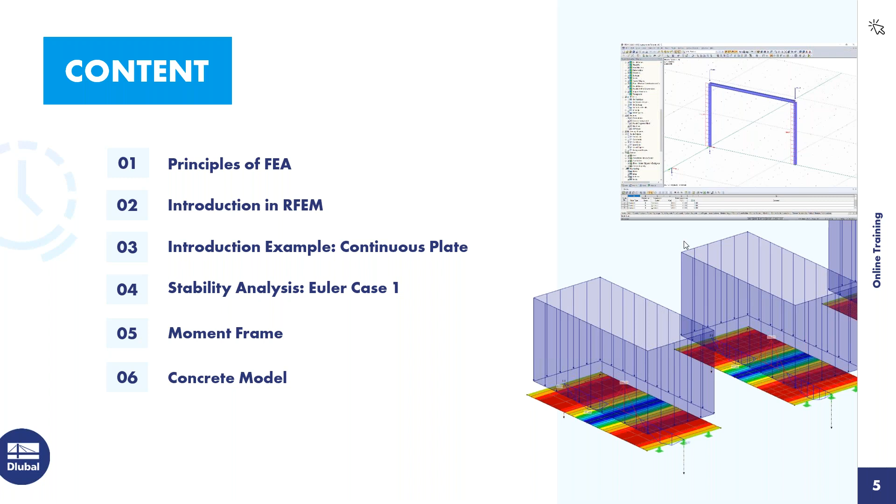So now we can just dive right into the first subject, which is the basics of FEA software.

When using computer software like FEA software, it is mostly and usually based on the displacement method. Another method you may be aware of is the force method, where the unknown is the force and the internal forces need to be calculated. With the displacement method, the unknown is the displacement. So to solve for this, the displacement vectors must be calculated, and then the internal forces and support reactions can be determined. The main problem today is an analytical solution can be difficult to determine with large complicated structures.

Doing hand calculations for some structures with complicated and odd geometry can almost be impossible, or feel like it's impossible. The limits are being reached with large complicated structures, and it's just difficult to get accurate results. So this is where FEA software comes in.

Structures can now be modeled and converted into a finite interconnected element mesh. The material and cross-section properties are determined or given at each FE mesh node. The mechanical behavior is transferred between these elements. Discretization is a word that I would like you to walk away with, and this is the act of structures being submeshed into finite elements, which is done in FEA software.

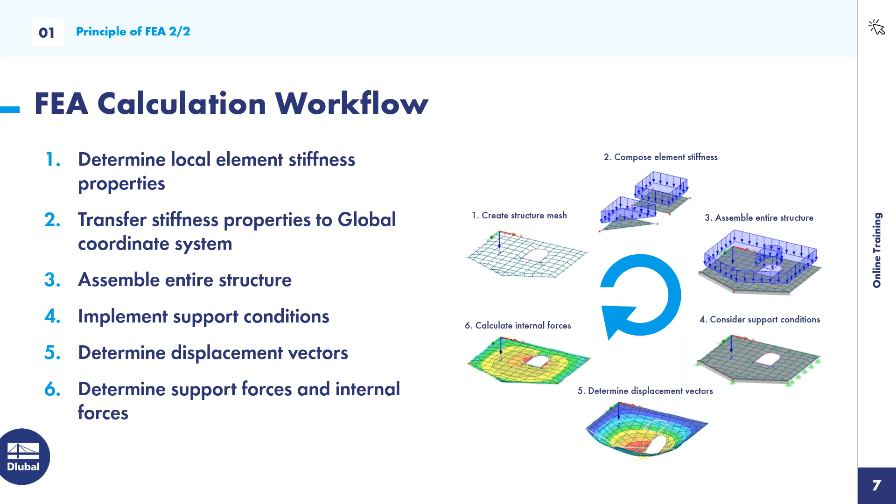But before we do that, I do have a question or a test to give, so I'm going to pull that up. You should see that on your screen right now. I'll give everyone about a minute to answer that, and then we can go over the answers.

Okay, so it looks like almost everyone has answered, so I'm going to close the question. You can see the results here: 18% of you answered the second option, and 82% answered the first option, and it looks like most of you got it right. The correct answer is that the decomposition of structures into finite elements is discretization. So that's great, good job.

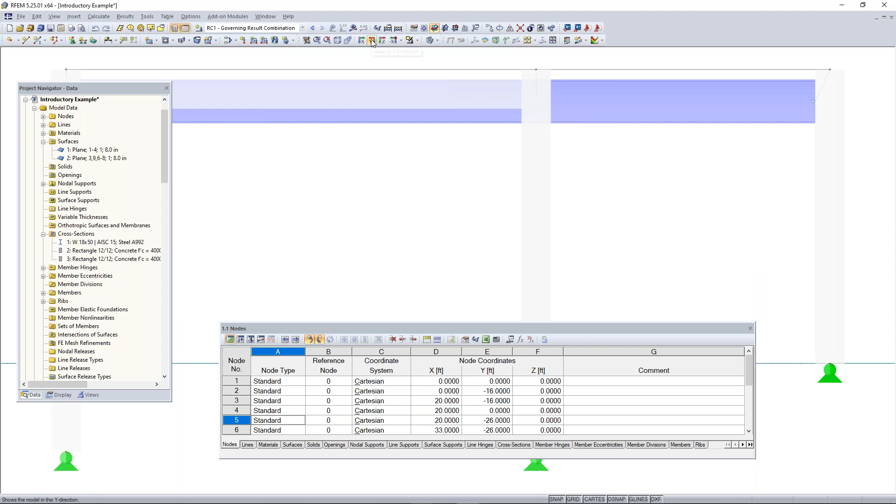We can also change the view of the model. If we go up here, in this category of the toolbar, we have views in the X direction, the Y direction, and the Z direction. We can also change these into the reverse direction, so if we want to get an elevation view of our model, or maybe a top-down view, we can choose these views.

In the project navigator, at the bottom here we have a folder called add-on modules. RFEM is great for viewing things like internal forces, but if you want to design your structure or elements of your structure, you will need to use add-on modules, which all student versions of RFEM come with, every single add-on module. This is handy and you can play around with these—they're basically for design of different materials, organized that way. You can also find the add-on modules up here in the toolbar, organized again based on design.

Next, we have in the project navigator our display tab down here. The display tab basically allows you to turn aspects on and off within RFEM. For example, we can turn off something like our surfaces, and this just turns off the rendering and display—the surfaces are still there within the analysis, this just allows you to turn them on and off visually. This is all organized based on expandable and collapsible folders, so things like loads and results, we can also turn on and off.

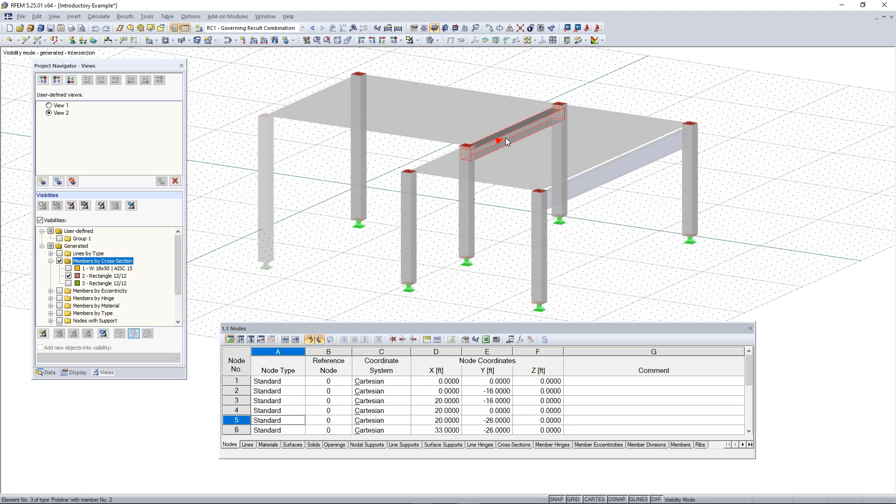Then the next tab we have is our views tab. We can create a visibility by turning our visibilities on. You can see right now I have my members by cross section checked, and if I turn this visibility on, only my members by cross section with a cross section of 12 by 12 will be shown—that's my beam member right here. If I turn that off, then everything is turned off within my model.

I can do the same thing for materials. So if I only wanted to view, let's say, steel A992, then this is the only thing shown in my work window, and the rest of the model is grayed out. I can right click and uncheck show hidden objects in the background, and then we simply have our beam there.

Next tab to show, if I turn off my visibilities, is the results tab, and this is the last tab in the project navigator. If I turn on my results, the results tab will pop up here, and again it's organized similarly to the display and data tab. I'm not going to go into the results in detail right now, but we will later on within our other examples. So I'm going to turn these off.

The last thing to go over before we hop into our example is how to navigate through RFEM. You can click in the scroll wheel button if you want to move your model around, and use the scroll wheel to scroll in and out. Then you can hold Control and click in the scroll wheel to rotate the model. If you don't have a scroll wheel, you can go up here to this tool called Move, Zoom, and Rotate. You can click on that and then left click to move.

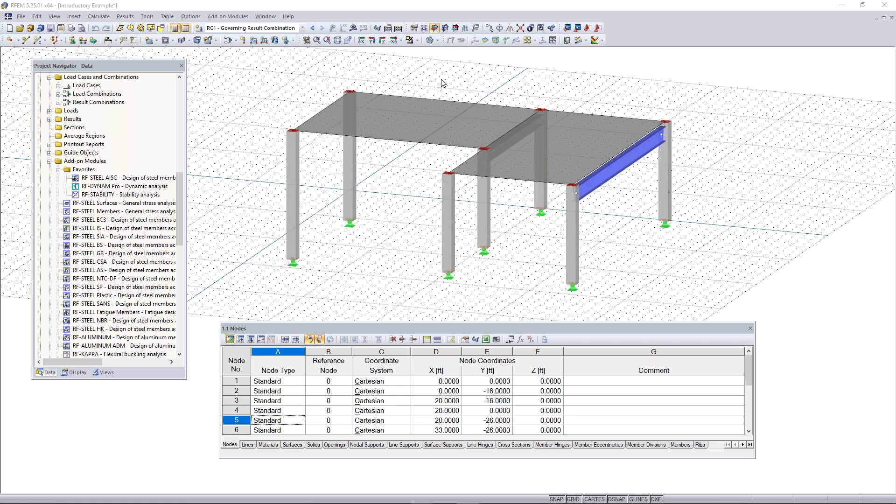Now we can go in and open our new model to start modeling our continuous plate example. First, let's go up to the new model button—this is a way to create a new model. You can also do this by going up to File and clicking New. We'll go to our model name, and we have to give each model a name, so we'll name this continuous plate example. You can also enter a description for your model—this isn't needed, but it is an option here.

Next thing to look at is the type of model. This is going to be a 3D model, but we could make this a 2D model, and you can choose the plane where you want your 2D model to lie in—X,Y, X,Z, or the YZ plane. We're going to leave our type of model as 3D, and right next to that is how the load cases and combinations are classified—you can select which standard you want your load cases and combinations to be according to.

We have a long list here of international standards: the US, Canada, Eurocode, and a list of others. So for now, I'm going to leave this as none, but let's say I wanted to design my model according to ASCE 7-16.

We have the option to create combinations automatically based on the load cases you create, and then the action categories are taken from there as well, and everything is created automatically. For this example, we don't need to worry about a standard, so we're just going to leave this as none.

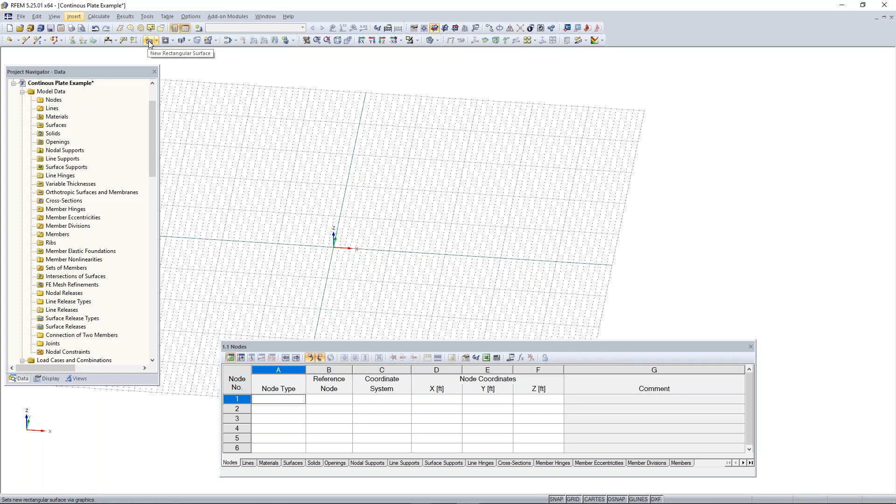Or instead of going to this menu, we can simply just go to our toolbar up here and locate the new rectangular surface toolbar button, which looks like this right here, and we can click on it.

And then you'll see that our new rectangular surface dialog box will pop up. The only thing you need to worry about here is, if you're not changing anything, we're going to keep the stiffness as standard. We just need to tell the program what material the surface is going to be and what the thickness will be. So right now it's saying create new material.

We can either create a new material and enter the material properties using this button, or we can go to our material library and select a predetermined or predefined material. So we'll click on that button, and then the material library will pop up in just a second.

So this is the material library within RFEM, and whenever you're choosing a material for any element, this is what will pop up. On the left-hand side, we can use the filter to find the exact material we're looking for, or we can also type it in the search bar down here. I'll just use the filter for this example, so we can choose concrete, and then we can choose concrete again for the subcategory.

I'm just going to use ACI concrete for this example, and I'll choose the latest ACI standard, 2019. Then I'm just going to pick concrete 4000 PSI. I'll choose that, and then you can see down here you can take a look at your material properties if you want to check those out. Then we can click OK.

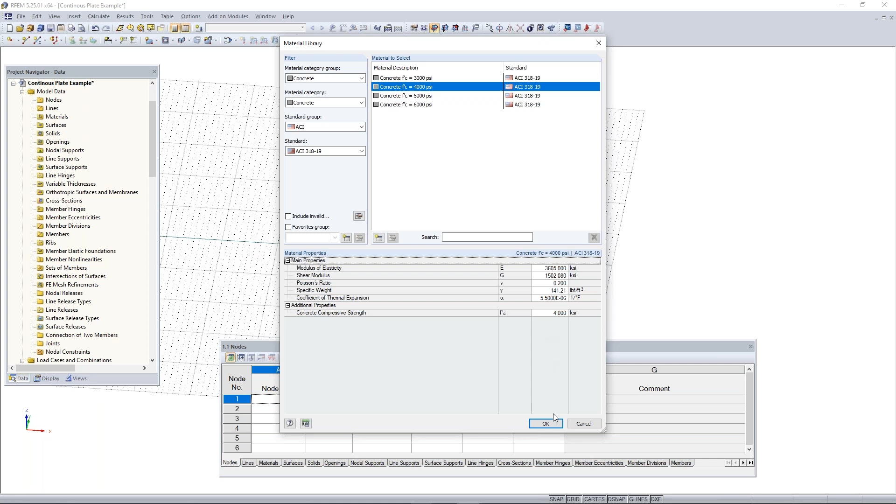So now we have our material chosen, and now all we need to do is tell the program how thick we want this material to be. By default, for imperial units, 8 inches is selected. We want to increase this to 12 inches for these plates. Then we can click OK, and now we can draw our plate.

You'll see my cursor has turned into this reticle-looking cursor, and I also have the coordinates right next to it telling me where I'm located along my XY grid plane. So I'm going to choose the origin, and then I'm going to draw a 32 by 16 foot plate. All I need to do is move over horizontally 32 feet, and then I can move up 16 feet in the vertical direction, and then left click.

So left click at the origin, and then left click a second time to mark that second point. Then I can right click, and once I right click, that will cancel out of the tool. You can also hit escape if you like as well to cancel out of a tool.

Now you see we have our plate here, or our rectangular concrete surface. Now the rendering in RFEM is just simply a 2D element with boundary lines defined, but in the calculation, the stiffness will be taken as 12 inches thick, so no need to worry about the rendering. This boundary line is located always at the center of the surface, so there will technically be 6 inches on one side and 6 inches on the other side.

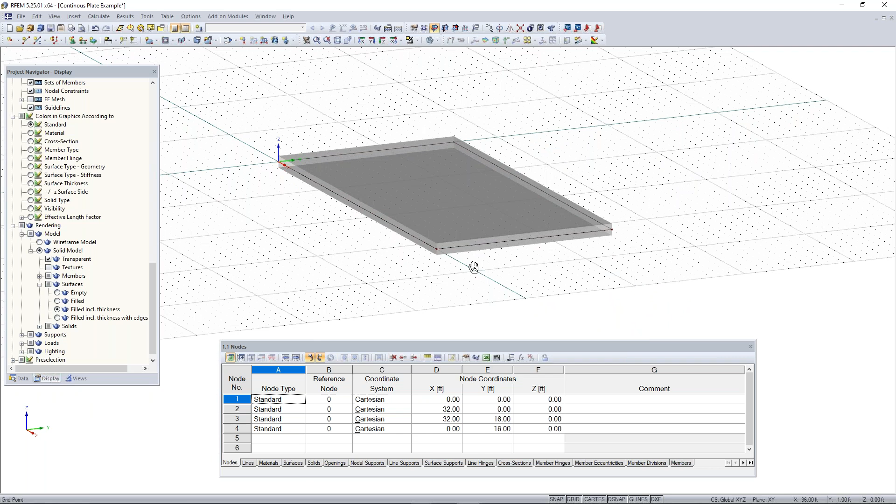If I go to my display settings and scroll down, we can change the rendering real quick just to show you what I am talking about. So if I go under rendering and change this to filled, the definition of the surface is always at the center. So if this is 12 inches thick, there's 6 inches of thickness on one side and 6 inches on the other side. I'll just turn this back to default, and then we can move on with modeling the other plates.

I can model the other plates by just going back to that tool and clicking OK. Then I'm just going to model the second plate right above the first one, and it's going to be 5 feet away from the first plate. So I'm just going to draw this one, and again it's going to be the same dimensions, 32 feet by 16 feet. Then I can right click to exit out of that.

Let's say I already have this surface here and I need to just duplicate it. I can simply select this second plate here by highlighting it from right to left or from left to right. Then I can use the tool up here called move and/or copy.

This tool allows me to make one copy of the element I selected, and then I just need to tell it which way to displace it within the plane. I can either enter displacement vectors, or use this graphics tool. I'll click this button, and then simply move this plate.

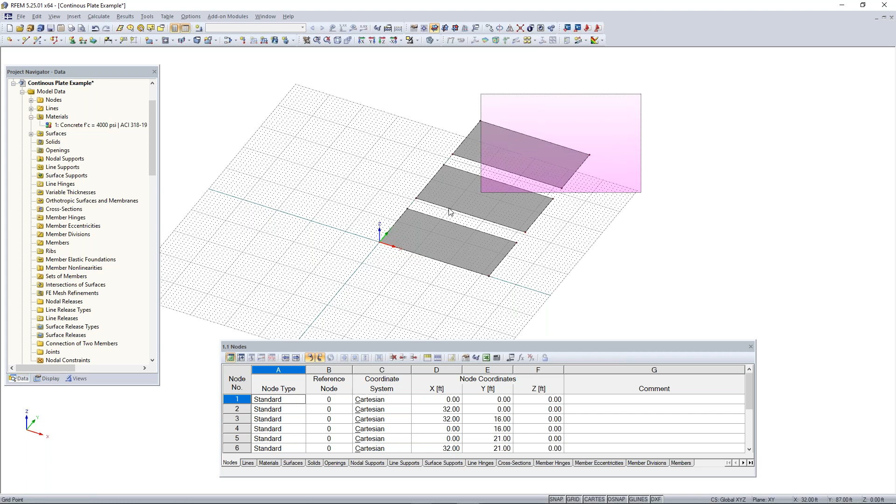Now we have all 3 of our plates here, and since my grid is only 50 grid points, or 50 feet by 50 feet, I'm just going to highlight all of my plates, left click, and then I can move my plates down into more of the center of my grid.

Next thing we want to do is model our beam. So what I'm going to do is create a new cross-section or create a new member. To create a new member, we can either go through the insert menu or choose the button here, new single member. I'm going to click on new single member.

Under new single member, I'm going to go to the cross-section library. This is the new single member dialog box, similar to the surfaces dialog box, where we can choose our member type. For beams and columns, we want the member type beam. Then for our cross-section, we can choose cross-section start.

We can either create a new cross-section or go to the cross-section library to choose from a predetermined cross-section shape. So I'm going to click on the cross-section library.

Once that pops up, you can see our cross-section library is organized by rolled and built-up sections based on a standard. Then we have our parametric thin walled sections, which are parametric so you can choose the dimensions manually for each. We have parametric massive, usually used for concrete, and parametric timber, which you can again use for timber and choose the dimensions for.

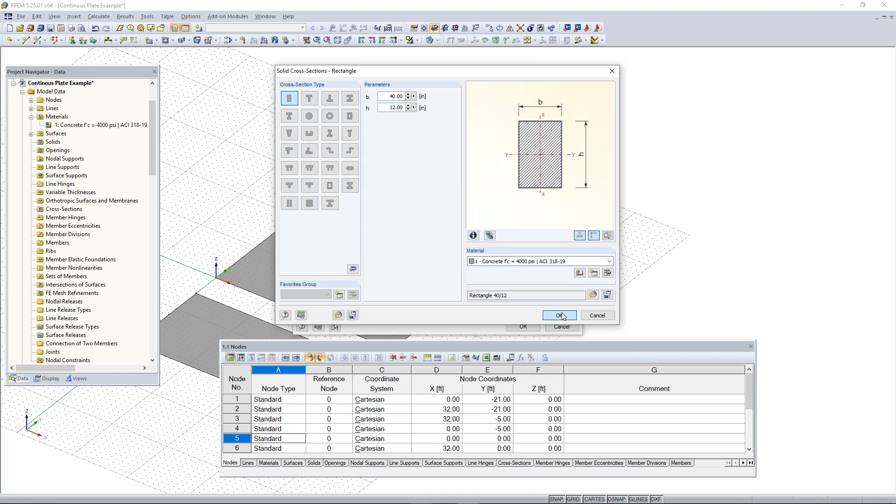Now that we have our dimensions in, we can choose our material, just like the surface. Since we already defined this concrete 4000 PSI material, we can simply use that instead of going into our material library again. So we can click OK, and then click OK out of that box.

I'm just going to draw this continuous beam 5 feet above this plate, so it resembles this plate, and then we can easily compare it in results later on.

Once I draw my beam here, you can see that the rendering looks like this rectangular shape. And if I change my model from a solid transparent display to a wireframe display, you can see that all members drawn in RFEM are simply 1D elements, and that's how they're calculated in the background. The shape you see is just a render over top of that 1D element, and all that's used is the cross-section properties and material properties to calculate the results on this member.

You can also see that our surfaces are made out of these 4 boundary lines, and this dotted line shows you that there is a surface made up here. So again, we can use this button to change the rendering of our model, and then move on with dividing up our lines and adding some supports to our model.

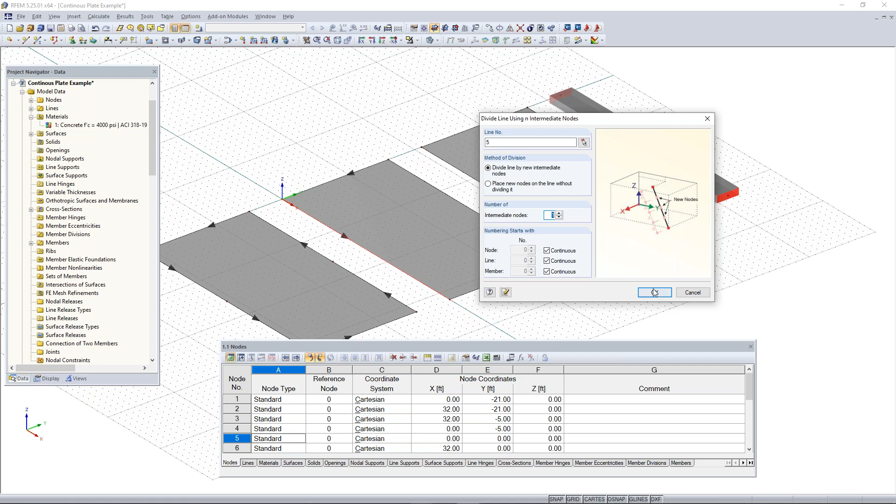The next way we can do this is by right-clicking on this line and dividing it by intermediate nodes. When I choose this option, arrows pop up on each line showing the orientation we drew it in, which helps us know that. We can choose how many nodes to divide the line equally by. We'll choose 1 and click OK, and you can see the line is divided equally with this 1 node in the middle. Now we do the same for this line and click OK, and we have our 2 lines divided by nodes.

The third option for dividing a line is to use the distance tool. With this tool you can divide a line by distance and get more accurate placement of your nodes. This is mostly why you'd want to know the orientation of your member when dividing a line. I've chosen this line, here's the start, here's the end, and I can type in 50% from the start or end, or a specific distance. 50% is halfway through 32 feet, so 16 feet. We want to use the true line length, and divide this line by a new intermediate node. I'll click OK, and it's divided halfway through, and I can do the same for this last one.

Now I need to divide this member too, so I can do that using a distance halfway through, and click OK.

Now we need to add supports to the rest of these plates, and add line supports to the center of these plates. So I have to add in a line, using the new line tool. I can draw my line and my cursor snaps to these nodes, so I'll snap to this node and then the last node. Then I can exit that tool, and instead of drawing the rest, I can use this powerful function where I click and select a line, hold Control, left click and drag to make a copy and drag that element wherever I want. So I'll left click, hold Control, and drag this line to the last plate.

Now we can add in our line supports. Within RFEM there are two different supports: nodal supports for single points, and line supports for the whole length of a line. I'll go to the New Line Support button and add in hinge supports. We can choose from two presets for line supports: the hinge support is fully fixed in translation but fully released in rotation, and the rigid support is fully fixed in all 6 degrees of freedom. You can see how that's checked, showing how the condition is defined. I'll use the hinge supports and click OK.

Then I can choose and click on each of my lines here, and simply do that for the rest of my lines to add in my supports to these plates.

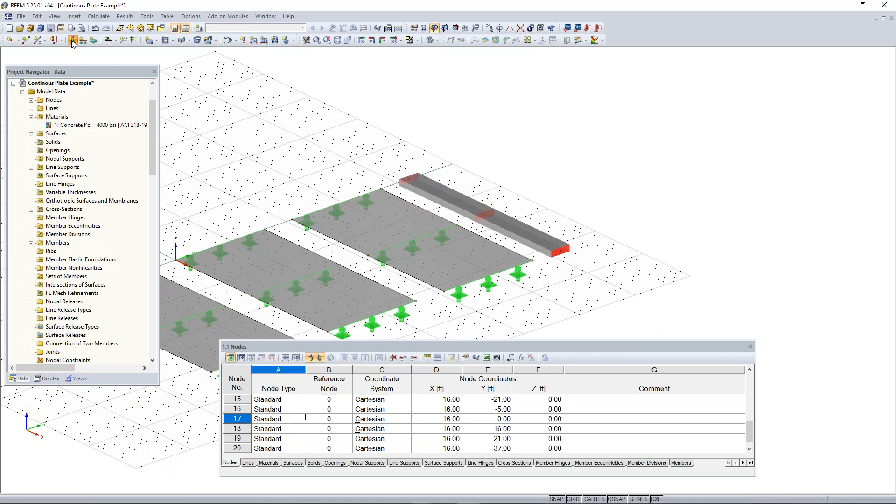Then we do this for the beam, but for the beam we're going to be using nodal supports. I'll go to my new nodal support. This is similar to line supports, but we have a couple more options: hinged, rigid, and sliding in the X and Y directions. For the first two supports they're going to be hinge supports, so I'll choose hinged and choose my two nodes here. But for the last support we need to make this a different type of support and change the definition, so I want to create a new nodal support.

Under the new nodal support dialog box, you can see we mostly have our support conditions for defining our support. For this one, we want all 3 degrees of translation in the X, Y, and Z directions to be fixed, but for rotation, we want to fix only the rotation about the x-axis.

The reason for this is because if all 3 of these supports on this beam were simply hinge supports, the beam would be able to rotate infinitely about its x-axis, causing an instability within the program. So we need one of these supports to lock the rotation about the local x-axis.

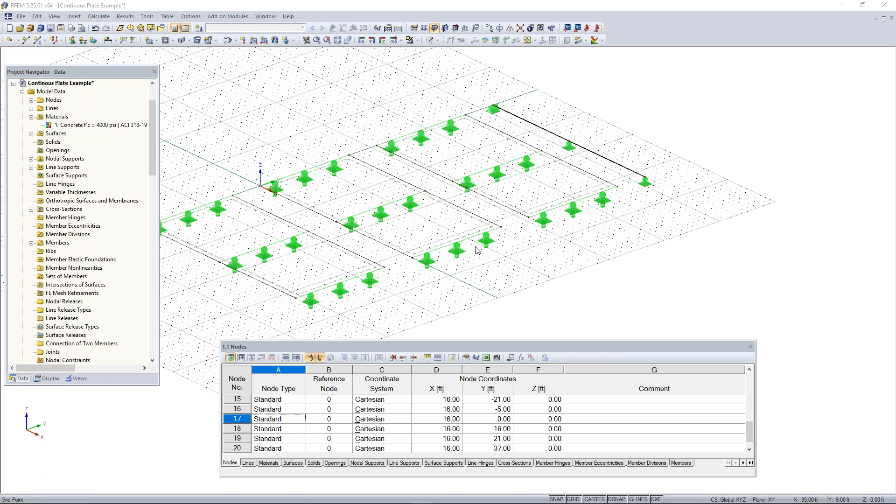So I will hide the test now, and we can move on with the rest of our modeling. Now that we have our model fully entered and all the model data created, what we need to do now is add in the loading now that we have our supports.

To add loading in RFEM, the first thing you need to do is create a load case to assign that loading to. So we go up here to this button, new load case. Once I click on that, the edit load cases and combinations dialog box pops up. You'll see that we clicked new load case, and RFEM automatically created this first load case and assigned the action category dead to it.

What we need to do now is enter a description, so we'll just name this load case 1, since we're not designing this according to any standard and the action category isn't too important right now. You can see self weight is automatically turned on for dead load, but for this example we don't want self-weight activated, so I'll uncheck that option. The -1 in the z direction for the factor and direction just multiplies this factor by the self-weight of the model in the downward direction to simulate gravity. We'll turn this off for now and click OK.

I can drag from right to left to select my loads, select all of them, and double click them. Then all I need to do to change or flip the direction is add a negative sign. I can click OK, and then rotate my model back. And you can see my loading has been added.

I can also turn off this grid in the background now that we're done with modeling, to get a cleaner look. Down here are buttons used to turn off certain functions like snap and grid. You can also change your grid to a polar grid, but we'll keep it as Cartesian. You can turn off other things like guidelines as well. So we'll turn off the grid, and now we have a cleaner look, better for presenting.

The next thing we need to do is add our loading to our member. For members, we want to use member loads—always keep that in mind. For lines, you want to use line loads. That's how you know the difference between these two. Since we're applying a load to the member, we want to use member load. This member loading is going to be the same as the uniform load or surface load applied here, just converted into a linear load.

We'll keep the load type as force, and it's going to be uniform. Direction, it's going to be a gravity load, so global z direction, we'll keep that the same as well. Then all we need to do is enter our magnitude, which is going to be 0.210 kip per feet—basically 210 pounds per feet.

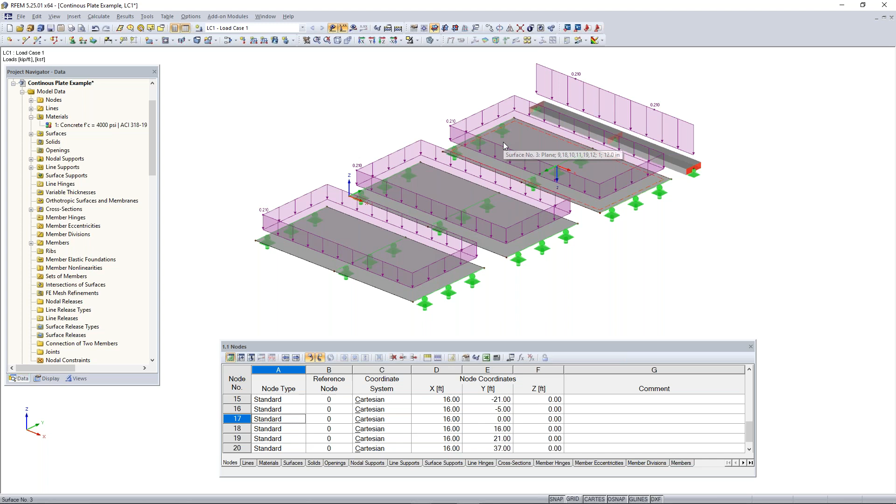Now we can add in or edit our FE mesh. FE mesh for members is not too important, but FE mesh for surface elements within RFEM is pretty important—this is what you need to look out for. We can go up here to calculate, and just see what the global FE mesh looks like when we hit generate FE mesh. You don't have to do this before any calculation, but for example purposes, I wanted to show you what the FE mesh looks like.

It's easier to view if I turn this into a wireframe view, since it's gray on gray. You can see this is what each FE mesh element looks like on our surfaces here. If I go to calculate and then FE mesh settings, by default in imperial units the target finite element length for each mesh element is 1 foot. This actually looks pretty good on our surfaces, but for example purposes, if we needed to refine our FE mesh for certain elements, you can do this.

So what I'm going to do is add an FE mesh refinement to each of these surfaces with different lengths. I'm going to turn off the global FE mesh for now, then right click on the first surface here, turn this back into a solid transparent view, right click on the first surface, and go to FE mesh refinement, then new.

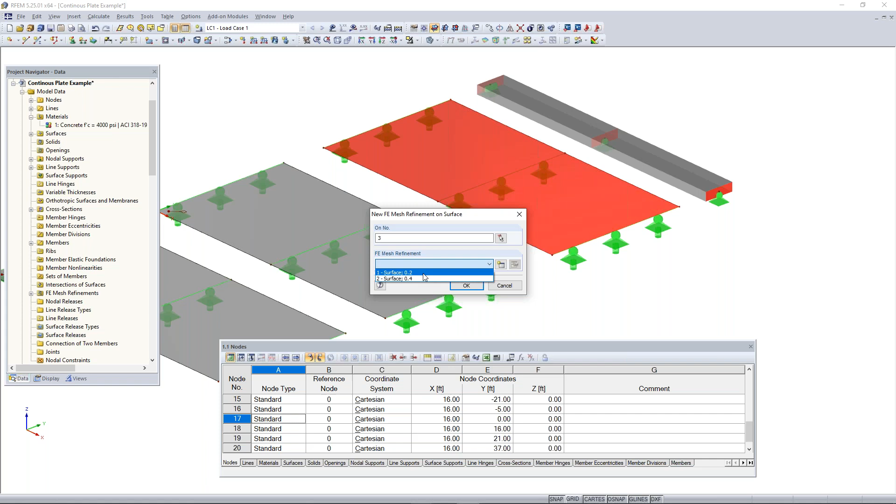For the last one, we'll do the same process. You can see those other refinements I created could be chosen as a preset if we didn't want to create a new one. But for this surface, we want to increase the length to something like 0.6. We'll click OK, click OK again.

If I go to the calculate menu and select generate FE mesh, then turn this into a wireframe view and display the FE mesh, you can see this little symbol on our surface telling us we have an FE mesh refinement on the surface. Those symbols are different shapes, telling you easily what the FE mesh length of the refinement is. You can see the difference in FE mesh length between these, from 0.2 feet to 0.4 feet to 0.6 feet, giving an example of how FE mesh lengths can change over these different plates.

So the next thing to go over would be the sections. We need to add some sections to our plates here. To add section cuts, which allows us to take a cut down any section to view our results along that plane, I can go to our button define section, and hit the drop down arrow right next to this button to get more options with this tool.

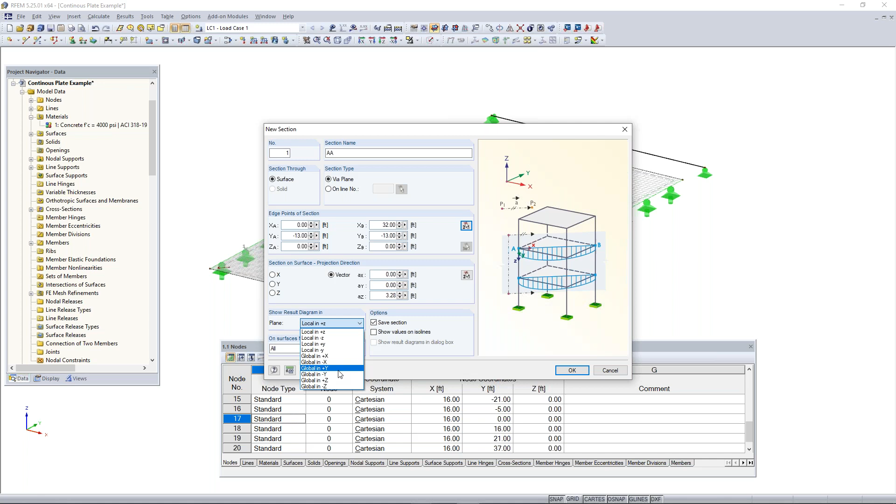We want to save this section and click OK. Now you can see these dotted arrows are telling us we have a section cut, and you can also see the name of the section cut there as well.

If I want to add more section cuts, one to the center plate and one to the third plate, instead of going through that process again, I can simply hold Control and drag and drop my section cut - and it did not copy. Let's try that again. Hold Control and then we can drag and drop. Control Z is also a great function to undo things. We'll try this one more time. The drag and drop feature right now is not cooperating, so let's try one more time.

There we go. Then we can do that a third time for our third plate - hold Control, left click and drag, and make that copy. Now we have our section cuts on our plates.

Then I can change the names of these section cuts. Right now this one's AA, but these ones have odd names to them. I can go into my project navigator, go to my sections folder and expand that, and you can see the names here. I can double click on one of them and change this name from AA to AB, and then change this third one to AC and click OK.

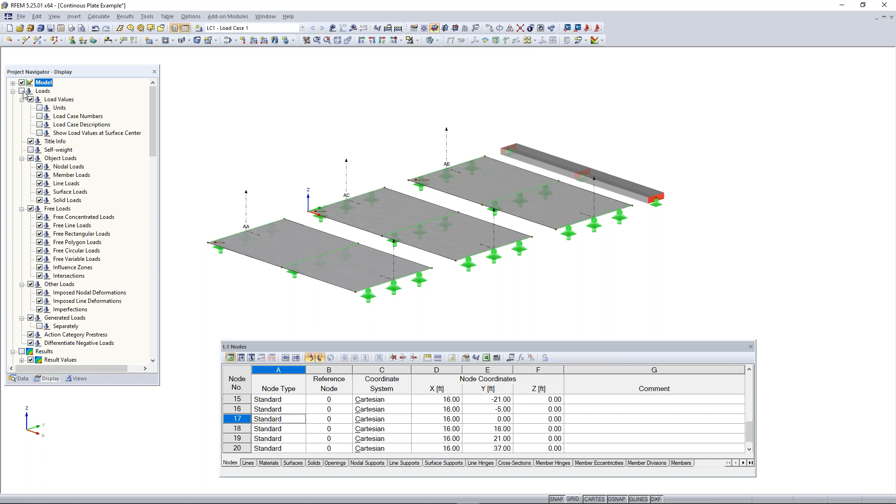If you wanted to see a graphical representation of the self-weight, or you're curious how that worked, you can go to the display tab in the navigator, go to the loads section, turn on your loads, and then also turn on your self-weight loading. That's normally hidden, but if you wanted to view what the loading of the self-weight looks like, you can see that there as well.

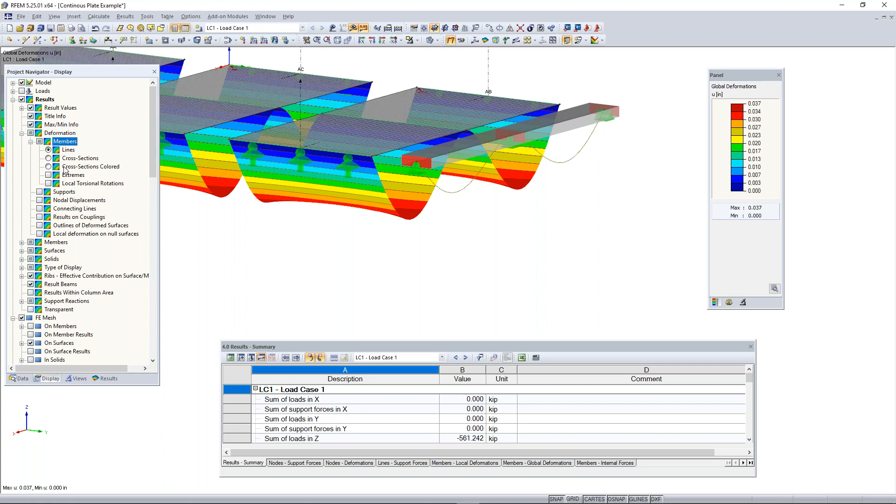Then you can see the rendered colored cross section deflection shape of our member, giving a better visual of what that looks like. You can see it's basically almost the same as the deflection for our plates, and we're going to go over comparing these results in just a little bit.

Then the next thing we can view, if we turn off our deformations, is the results on our single member here. So if I check on members and then under internal forces, I can check off the option to view our axial forces. We can also view our shear forces.

So VZ is for shear in the local Z axis. If I right click and turn on the local axis system here, you can see the local axis, so we have our Z direction, and this is the shear in the local Z direction. If I turn this into the wireframe view, we can get a nice look at what that shear diagram looks like as well.

Next thing we can also view is our moments about the local y-axis. So we can take a look at what that moment diagram looks like, and it looks like we get a max moment here of negative 21 kip feet.

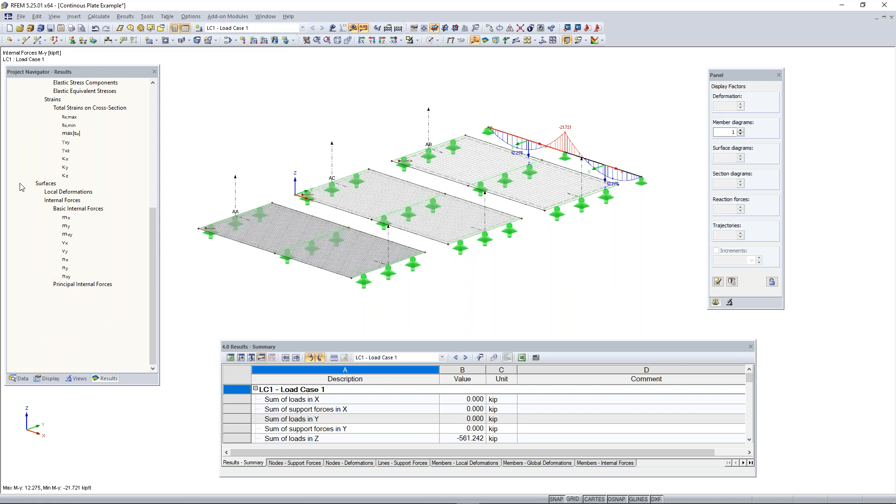So next we can also view is the surface results. For example, we can take a look at our internal forces of our surface, the moments or MX along the local x-axis. I can show the local x-axis of my surface here if I'd like.

By right-clicking on it and turning on the local axis system for all surfaces, you can see what that axis system looks like - similar to the member axis system. These are the moments along that x-axis, and you can see again that it is color-coded. This panel on the right-hand side will give you your max and minimum results and that color coding as well.

You can also take a look at shear on our surfaces here - this is shear along the x. Then we can take a look at our NX, or our N forces, axial forces on our surface. We don't have any right now because there are no forces in that direction.

Next thing we can also look at is our support reaction. If we go down here to support reactions, I can turn that on and you'll see what those look like. The line support reactions are a little more complicated, but this is just the forces or the reactions along the line here, so it's going to be a uniform reaction there.

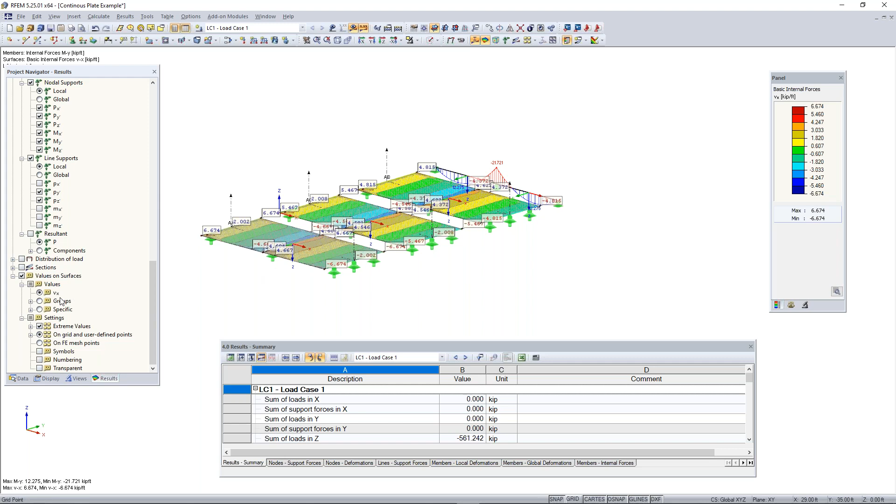So we can take a look at all of those moment reactions. The next thing we can look at is values on surface. We can turn on or off our support reactions to get a better view of the values, and show basically the extreme values on our surface to take a look at those forces in the surface as well.

Now that we've gone over the results, we can take a better look and activate the section cuts here. Now that we've added the section cuts along our surface, we can turn those on, and we can see what the shear of the surfaces are with a shear diagram and that section cut plane. So right now you can get a better look at how those results differ in accuracy between these different plates here.

That all depends on the FE mesh size, and you can see the accuracy increases the smaller your FE mesh gets. Right now we're looking at a negative, or max shear force, in the center of our plate of negative 3.397, and this was for the surface with the smaller FE mesh. You can see how that changes just a little bit, negative 3.397 and then negative 3.398, depending on the size of your FE mesh.

Like I said, you can go to the calculate menu. This is a good time to talk about how to choose the size of your FE mesh. If we go to the calculate menu, then to calculation parameters, we can go under the global calculation parameters tab here.

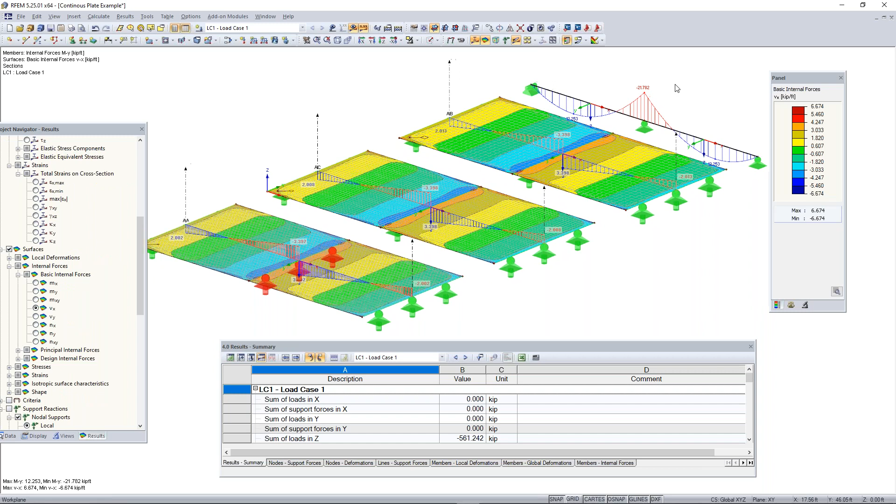You will see that our results change a little bit. If I hit calculate all, before we were getting about negative 21.7 kip feet on our beam here, and now we should be seeing something smaller. This mostly needs to be turned off because the methods used in school assume an infinite shear stiffness, when in reality there are some shear deformations happening when the member bends. So you need to keep this in mind when comparing hand calculations of deformations in RFEM.

Right now I just want to go back to the PowerPoint so we can go over and compare some plate theories. To help understand these plate theories, I will use beam element theories as an analogy.

For the analogy with beam elements, the first beam element theory is Bernoulli's, and the second is the Timoshenko theory. These are the basic assumptions for Bernoulli's theory: first, the cross-section remains in plane and perpendicular to the member axes. Second, there is no consideration of shear deformations, and the shear stiffness is completely rigid.

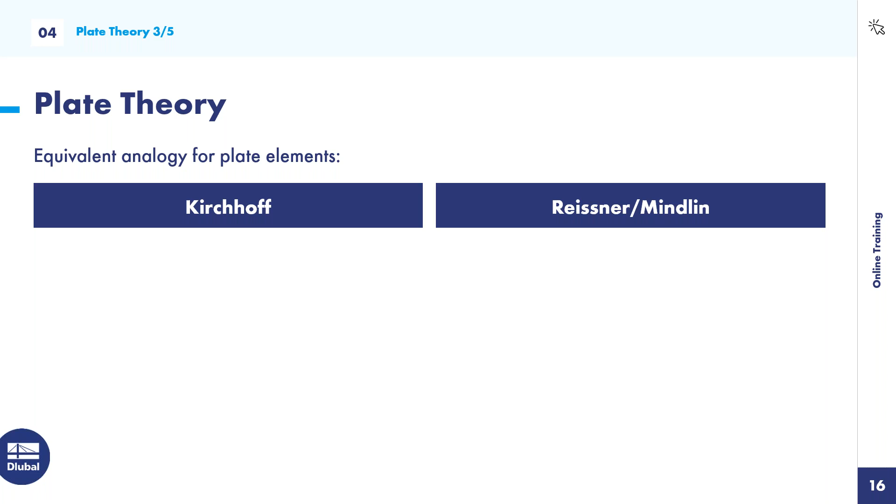For the Kirchhoff theory, we have to assume that we're using a geometrically linear analysis with small deformations. For the material, we're using Hooke's law, a linear elastic material. Cross sections are assumed to remain flat with no warping. We're assuming constant thickness. And most importantly, we're assuming there is no consideration of shear deformations.

Then for the Reissner-Mindlin theory, we're assuming basically the same aspects as the Kirchhoff theory, but most importantly, we're taking into consideration shear deformations, and we're also taking into consideration transverse and lateral strains. These two assumptions are the same as Timoshenko's. For Bernoulli's, we weren't taking shear deformations into consideration, whereas for the Reissner-Mindlin theory, we are taking shear deformations into consideration. Now, for taking transverse and lateral strains into consideration, you may be wondering what that looks like.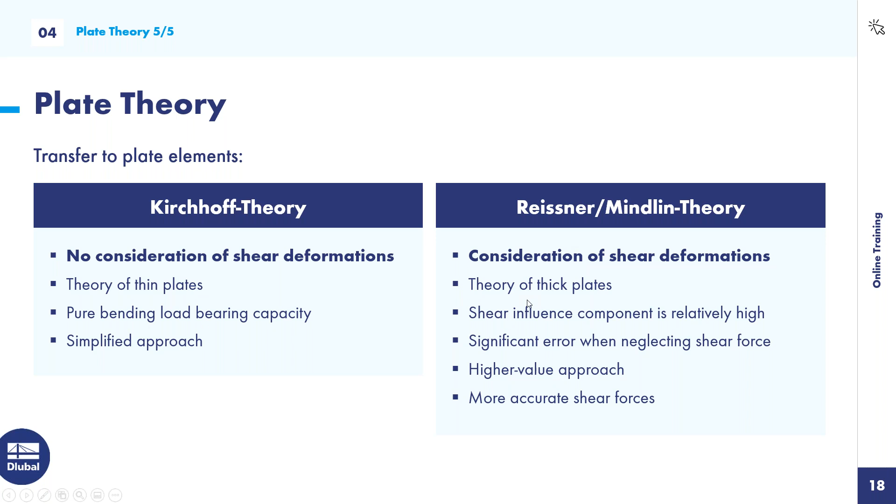So now we can switch back to RFEM, and we can take a look at where we can change those two theories within the program. If we go up here to calculate, and then to the calculation parameters, we can see under global calculation parameters, we can go down to plate bending theory, and you can see we have Mindlin and then Kirchhoff. So this is where you can change between the two theories. And again, this option up here, activate shear stiffness of members, is kind of switching between the two Bernoulli's theory and the Timoshenko theory.

So if you wanted to compare your hand calcs in school compared to the calculations within the program, and maybe you're seeing some different deformations for your members or for your plates, the issue could be that you're assuming an infinite shear stiffness when in reality the shear stiffness is limited. So turning off this option would yield the same results. So then if we turn this to the Kirchhoff theory and hit OK, we would have to rerun our results so we can see what those look like.

And once those results run, it should be pretty quick. You can see that we're actually now getting lower shear forces in our plates. So before we were getting something like negative 3.8, and now we're getting forces like 3.5. And you can also see how the results differ between these two plates with the different FE mesh elements or lengths.

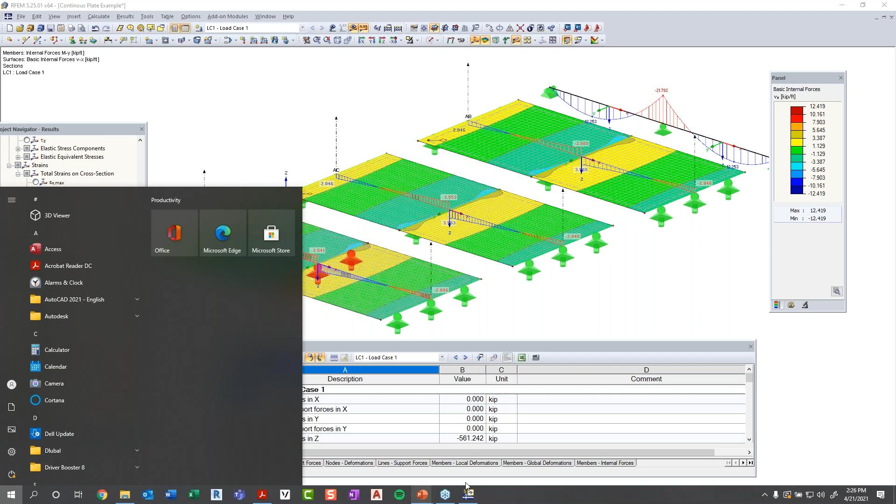So then next, I have another question. Let's go back to the PowerPoint again. For this question, if you could just answer it in the chat, that would be great. So the question is, what happens if the shear stiffness is activated? There are 3 different options, A, B, and C. If you could just enter A, B, or C in the chat, I can take a look at what the majority of everyone's answering, and then we can go over the answers in a minute.

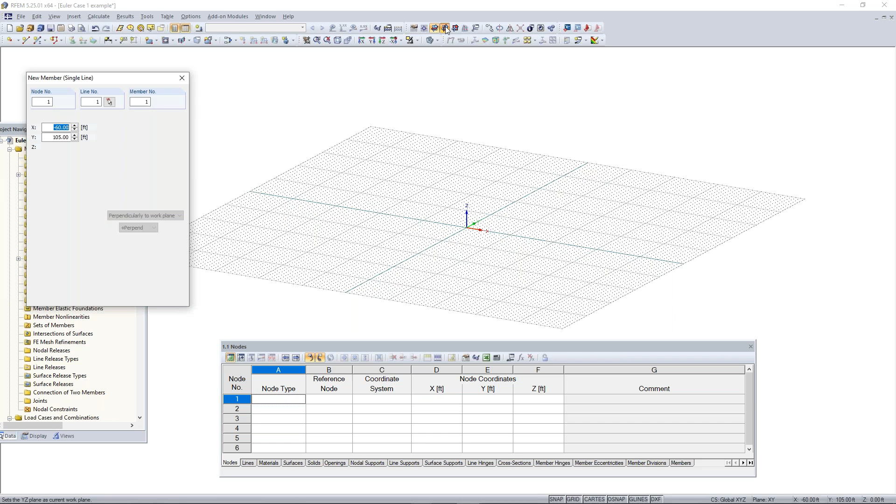So I basically want to draw this column out of plane, and there's a couple ways to do that. I can either change where my grid lies in my work plane by going up to the XY plane, and choose to change this to the X or YZ plane, or I can choose to change this to the XZ plane as well.

So to draw my column vertically, I'm just going to select the origin, then left click and draw it 30 feet up. And now my column's drawn.

Also, another way to draw something perpendicular to the work grid is to choose this option over here in our panel, length and direction. I could have just typed in 30 feet, chose perpendicular to work plane, this option here, and positive, and you can see that I could have placed my column like so, anywhere perpendicular to the work plane. So a couple of different options to choose from.

I'm just going to delete this, and now you can see we have our column. The next thing we want to do is add a support to the bottom here to support it, so I just want to add a nodal support here.

Something to go over real quick is highlighting things within RFEM. You can drag from right to left or from left to right, and this will only select objects that are fully engulfed within this box. So you can see I'm only selecting my node. If I drag from left to right, only my node is being selected, but if I drag from right to left, then anything touching this box will be selected. So now you can see that both my node and my column are selected when dragging from right to left.

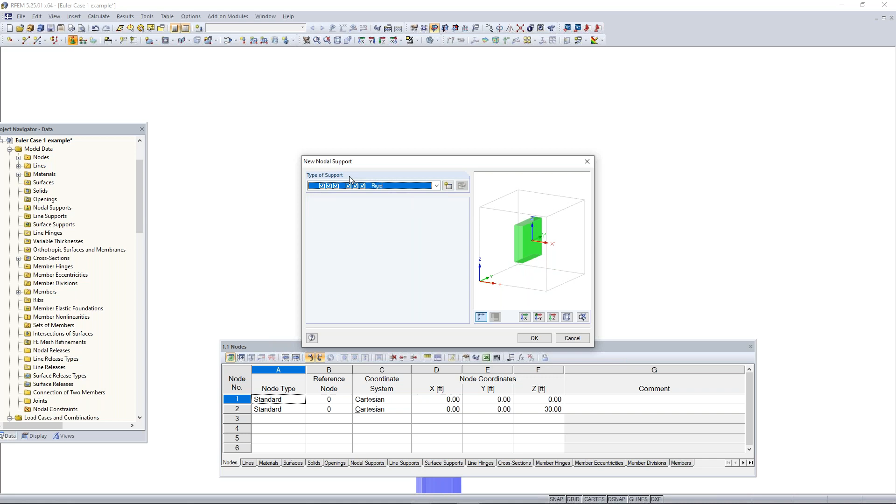This is helpful because if we go to new nodal support, instead of hinged, we're going to choose the nodal support hinge or rigid. So now all 6 degrees of freedom are selected. I'm going to click OK.

And then what I can do is just drag from left to right, and now you can see that only selected my node, and it also added my rigid support to the node there. So I can make this a little bit bigger to see, or actually I can't right now, but now you can see we have our column fully supported at the bottom.

And so now we just need to create our loading. I'm going to go up to my new load case button here to create my new load case. I'll click on that, and then the edit load cases and combinations dialog box should come up. You can see again, our dead load case is automatically created, so I'm just going to name this one test.

We also want to turn off self-weight for this example. Then I'm going to click OK, but I did also want to show you that our load combinations are generated automatically. We only have one load case, so we're only going to have one combination for LRFD and ASD, but you can kind of see how that works when you actually have other load cases with other different actions. We also have our result combinations that take all of the load combinations, create an envelope solution, and show you the max and min results. That's just a quick overview of how creating those automatically works. We only need one load case for this example, so we can leave all this the same and click OK.

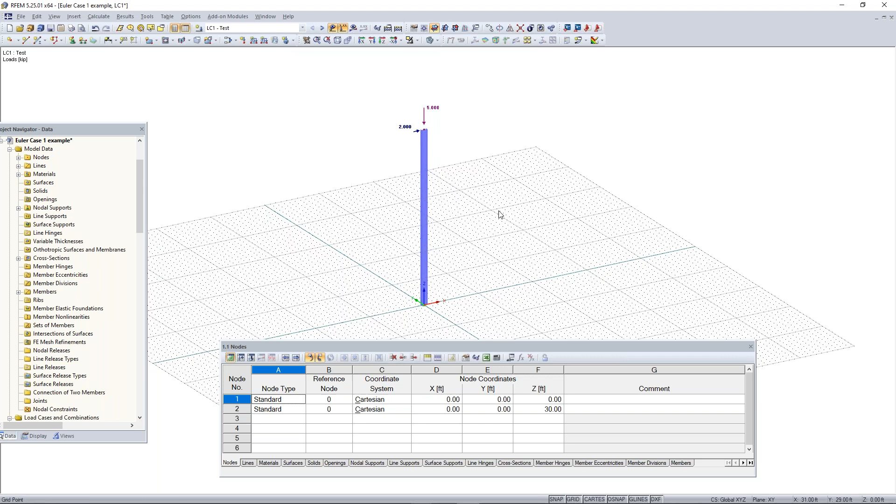Now I need to show you something pretty important. If I click on calculate all, this is actually going to run through our load case, load combinations, and result combination. I'm getting an error for very high deformations, but what we can see here is our global deformations. Right now in the elevated view, turning off my tables and grid, you can see that we're getting a max deflection in the x direction of 3.782 inches.

I can also display this as a color cross-section to get a better look. So this is what the deflection of our column looks like with the applied loading. Again, maximum deflection is 3.782 inches. We can also take a look at our member internal forces.

If I check on members, and then take a look at the MY results, the moments about the Y axis, you can see at the bottom here, at the support, we're getting a max moment of negative 60 kip feet. So try to keep those results in mind.

For load cases, this is a linear calculation or a first order calculation, and I want to show you how this differs from a second order calculation.

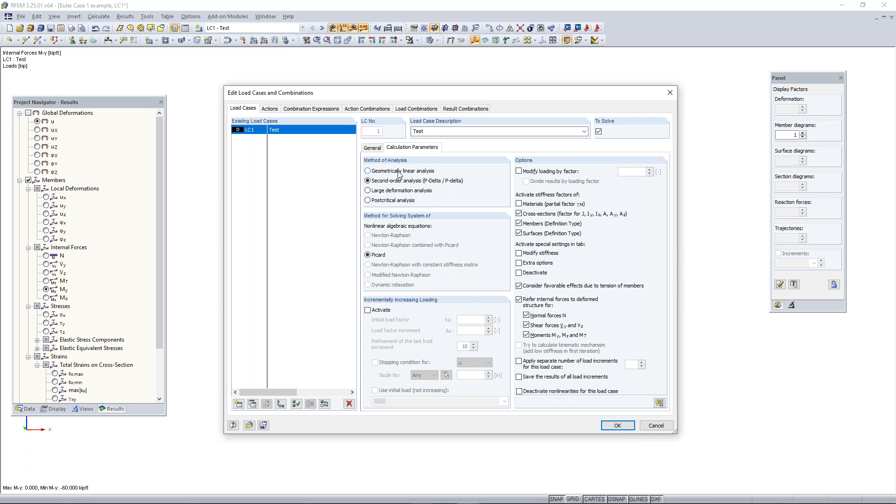Also in our member internal forces moment, you can see now we're getting a maximum moment at the bottom of our column of 61.6 kip feet, an extra 1.6 kip feet of moment. This is a result of the increased deformation, which leads to the applied axial load having an increased moment arm. So you can see how taking into consideration second order effects can really increase or lead to higher results within your structure.

So keep this in mind, that you will get two different results when switching between first and second order analysis. Load cases are always run by default as a first order analysis. And if we take a look at load combinations under the calculation parameters, these are always run as a second order analysis by default as well. Just keep that in mind when checking between first and second order analysis.

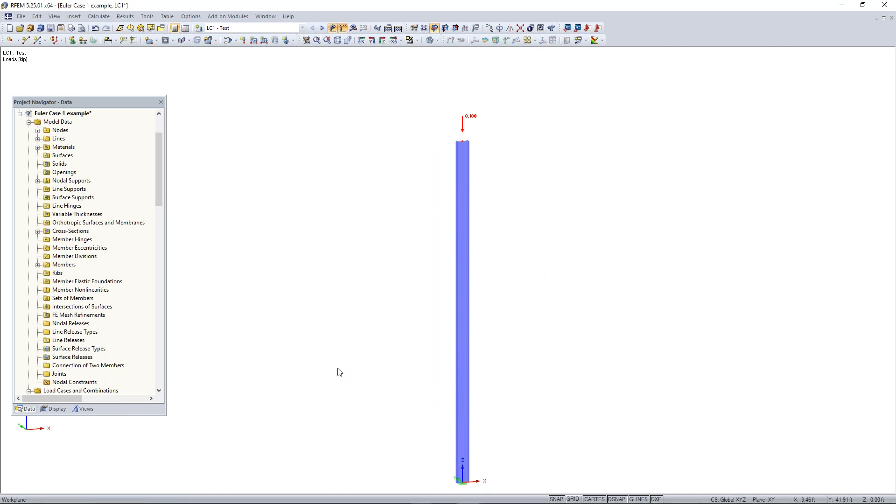Next, I want to open the RF stability add-on module. Let's say now we want to run a stability analysis on this structure here.

Again, in the project navigator, you can scroll down and find the list of add-on modules. We have a favorites folder here, so if you want to save an add-on module to your favorites, you can right click on it and select favorite, and then it will be added, so it's not hard to find if you use it frequently.

What I can do is go to RF stability and double click on it. And like I said, all students have access to all of these add-on modules with the student license.

Once the add-on module pops up, this is what it looks like. It's basically just a dialog box within RFEM, and all of the information from your structure in the background is taken into account within this dialog box. What RF stability does is use the help of eigenvalues and different eigenforms to perform a stability analysis.

Quick background: Euler was a mathematician who came up with different cases to show the critical load factors, as well as critical loads and lengths. This is something that every stability analysis does.

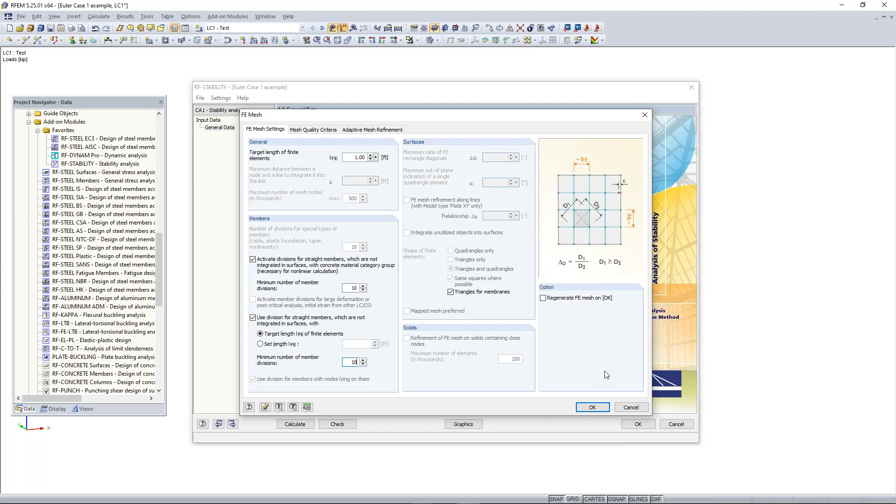So we'll click OK. Then the next thing we can do is up here, make sure we're choosing the right load case. We're going to run the stability according to load case 1 here. You can also run your stability analysis according to a combination as well.

Everything else we can keep the same as default. Calculation methods we don't need to worry about right now. So we can go over here to calculate, and once we click that, the calculation should run pretty quickly.

Now you can see we have our critical load factors and magnification factors shown here. The critical load factor on the left-hand side, you can basically think of as the amount you would have to multiply the loads by in order to get an unstable system. Or it can also be looked at as the total percent of the loads your structure can take.

For example, this critical load factor is 135 for our first eigenmode, and this is really good. If this was below 1, then we would have an issue, but we're basically fine, and we could probably increase the loading or decrease the cross-section size and material of our structure with this critical load factor.

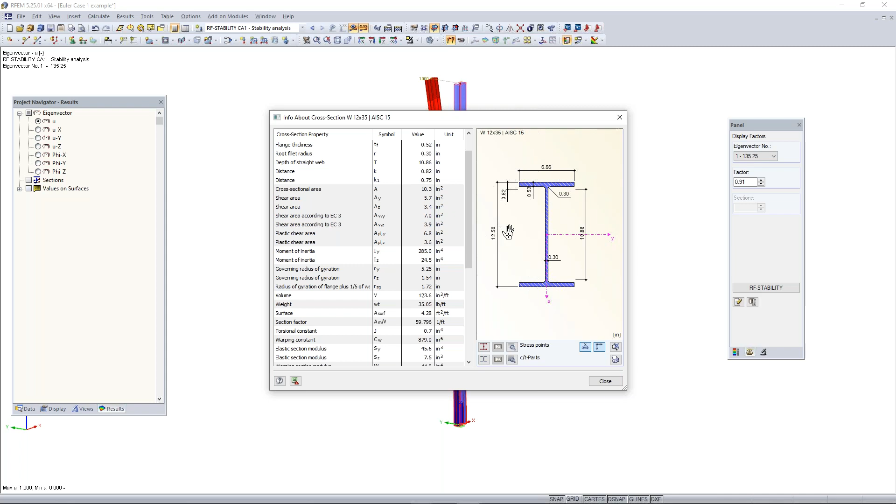Now let's swap back to RF stability. We can either go to our data tab and double click on RF stability, or go to the panel and click the RF stability button.

Under our RF stability add-on module, we can take a look at our effective lengths factor, and next we can show what it looks like when the structure is unstable because the loading is too high. So we need to change the loading at the top of our beam or column to something higher. Right now we only have 100 pounds at the top of this 30-foot long column, which is why our critical load factor was so high.

But let's say, just for example purposes, we change the loading to something like negative 14 kips. We can click OK. If we run this calculation, let's say you get an error message saying your stiffness matrix is singular and the model is unstable.

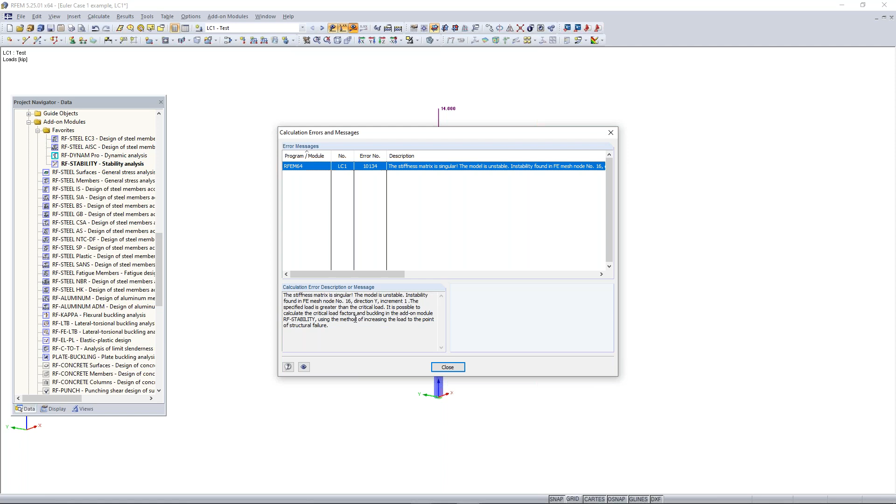It's possible to calculate the critical load factors and buckling in the add-on module RF stability. If you get an error like this and you're sure your model is all connected and set up properly, the first thing you'd want to do is go to your load case 1, or your dead load case. Right now we have P-delta turned on, meaning we're taking into account second order effects.

So to run a stability analysis, we need to make sure this is set to a linear analysis. I'll click OK, and then go back to RF stability.

Under RF stability, we'll again set our load case to our first load case. Make sure it's not a second order case, without any second order effects, because if it does we'll get an error within RF stability. So we'll run the calculation.

Now you'll see that our first critical load factor, in our first eigenmode, is lower than 1, which is not good. This means our structure can only take around 96.6% of the loading we applied to it, which is not good—it means it's unstable. This is how you can check if your structure cannot take the loading applied to it, and whether it's unstable or not.

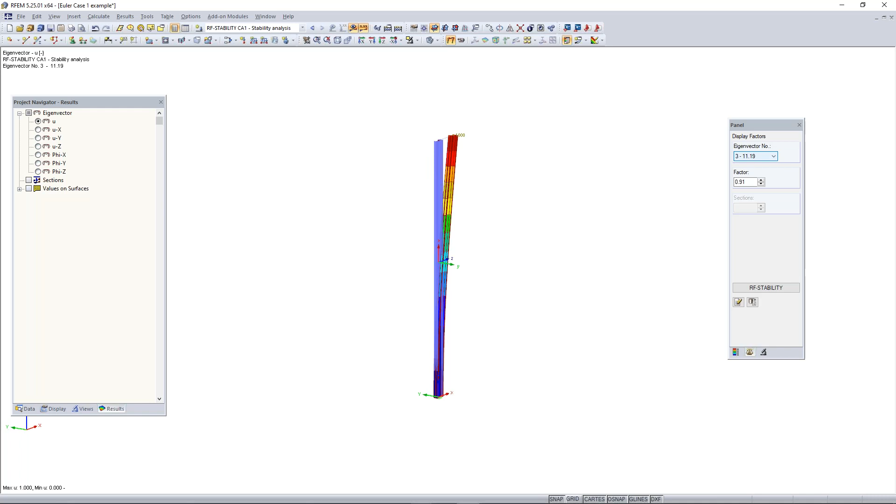Now I'd like to go back to the PowerPoint, and I have another question to ask. This is a true or false statement: the critical load factor specifies which factor can be used to increase the stiffness until the structural system fails. I'll give you guys about a minute to answer in the question section, and then I'll look and see what the majority of the answers are so we can go over them.

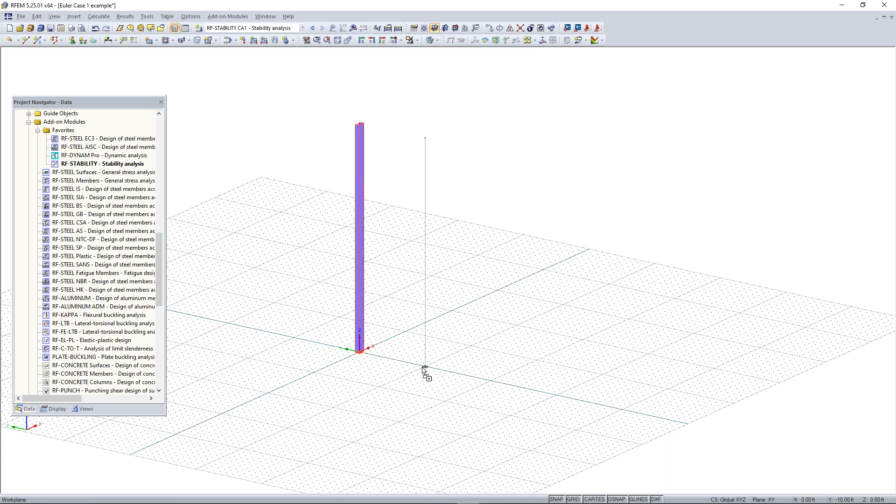So now we can move on to creating a moment frame out of this column here. If I turn off the results and go down here and turn my grid back on, we can right click and turn off the local axis system. Then I can take this whole column here, highlight it, hold Control, and make a copy of it 10 feet away. So now we have two columns here that will act as our moment frame.

Another thing we can do is shrink the height of these two columns at the same time by highlighting only the nodes at the top of them and double clicking on them. Then we can shrink this down to 10 feet. And now we have two columns here, both 10 feet high. We can simply just draw the beam at the top here to connect them.

So we'll go to our new member, and create a new member to act as our beam. This will open our cross-section library. We'll go to I-sections again, and then under I-sections we can go to W, and scroll down to something like an 8 by 15. We can click OK, choose the same material, click OK again, and then simply connect both of these columns here for our beam.

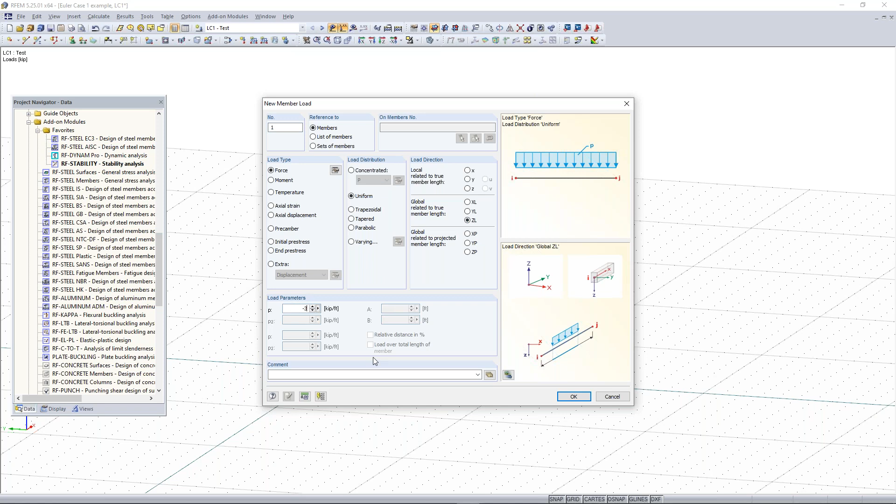The next thing we want to do, now that we have our moment frame, is add some loading to the top. We have our loads on our columns here, but we want to add loading to the top of our beam. To add the member load, we click on new member load, choose a force uniform, and for load direction we'll choose the global Z direction. Our magnitude down here will be something like -3 kip per foot. We'll click OK, add in our load, and choose our beam. So now we have -3 kip per foot applied to the top of our beam.

So now if we run our calculation for this, and actually hit calculate all, it will calculate all of our load cases and even the results for our stability, which makes it easier. Now if I go to my drop down here, again I can see my load cases, load combinations, and result combination. I can go to our stability.

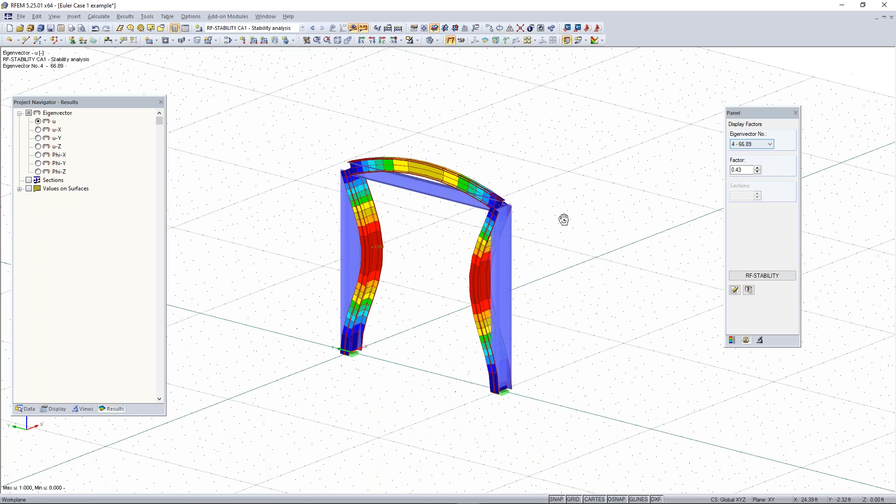Then in the panel here, if I go under the tab factors, I can take a look at the eigenvectors here, or the eigenmodes. I can cycle through them and we can see our critical load factor here is 20, so that's good. Then we can see each of our eigenmodes here for this simple moment frame. We can also see that our third eigenmode is warping or deforming out of plane here.

So let's say we wanted to make sure that normally our moment frame would stay in plane, or have some type of support at the corners here. I'm going to add supports at the top of the corners by holding Control and selecting both of my nodes. This is another way of adding supports. So we can double click on the nodes there and then go to the support tab, choose available, and I can hit create new nodal support.

Under this, I can choose to have those two supports be able to move in the X direction and the Z direction, but I don't want them to move in the Y direction. Then I'll unlock all rotation, click OK once more. Now you can see that those supports are added, and that they cannot move in... actually we wanted these not to be able to move in the X direction.

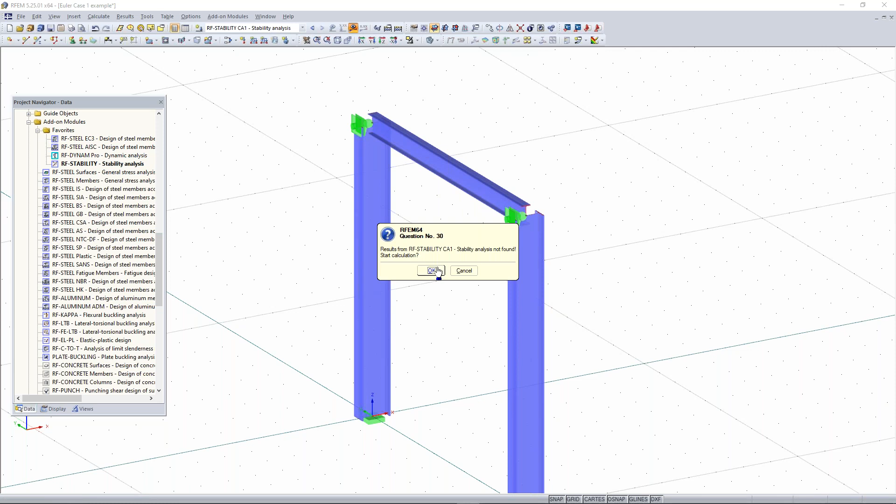So let me change that real quick. We want to change this to the X. Now if I click OK, these supports at the corners here are preventing the frame from moving in the X direction, but it can move laterally in the Y, and up and down in the Z. So if I hit calculate, or calculate all, the calculation will run, and then I get my results for our stability.

So I can look at my eigenmodes here, and now you can see that all of them, especially this third one, is staying within this XY plane, and we are getting good critical load factors. So that's how to create the simple moment frame from that column we had, and also how to run a stability analysis on your models.

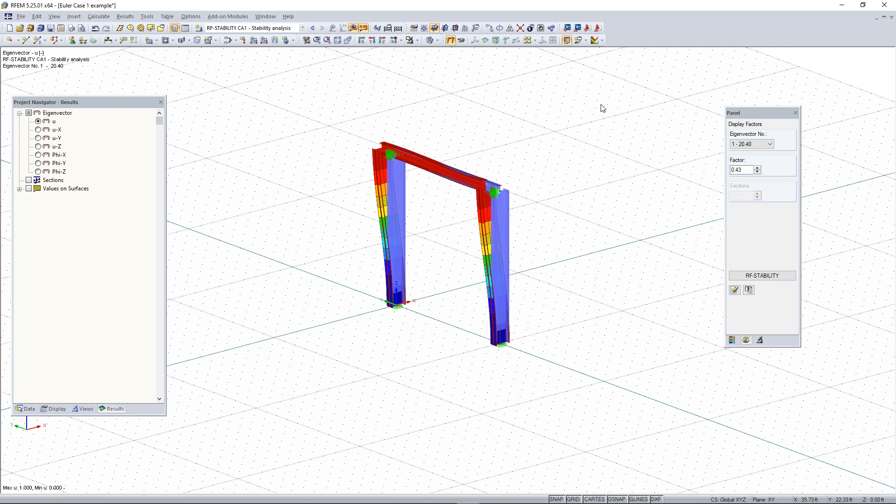Yeah, so we do have a direct integration method with AutoCAD. If I go back to RFEM, you can import models in from AutoCAD, so things like center lines are imported as a .dxf file, and if you're integrating line elements like center lines, that works great. Then you can save the cross-section name and material to those lines in the layers in AutoCAD and have those come over as members.

Keep in mind, members in RFEM are only 1D elements. So you have to make sure within AutoCAD that you have the center lines for the members, because that's the most important thing to have imported over. If you just have the actual shape drawn in AutoCAD, like the perimeter lines or boundary lines, all of those lines will be imported over and you can't really define the cross-section onto them.

With AutoCAD, things like surfaces are also possible, but they have to be defined in AutoCAD as 3D faces to be imported over directly into RFEM. If they're not defined as 3D faces, only the boundary lines of the surface will be imported over, which isn't too much of an issue — you can use tools in RFEM to create those surfaces from the boundary lines.

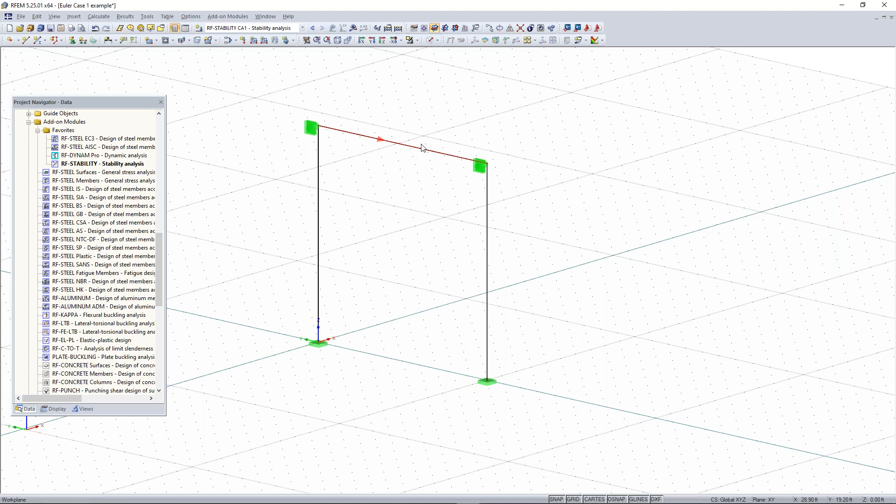So if I double click on one of these members, this is a good subject to go over member types. Within creating or editing a member, we have different member types. Beam members can take tension and compression forces, and you can edit the member hinges for the start and end of the member. But then you can also see we have cable member types here.

Cable member types basically only can take tension forces. They cannot take compression forces, just like a cable in real life would act, and you can't edit the end conditions of them. Basically, this member type will fail when it takes compression forces, and then it'll be able to take tension forces. Also, the calculation method for cables would be large deformation analysis, so it is possible to run that.

I'm not sure, maybe Amy has some more insight on this as well. Cable elements can be modeled within RFEM, as Alex mentioned. Automatically, the program will default to the large deformation analysis because we know cable elements are a little special in that the higher the tension force, the increased stiffness of the cable. It's important to know that if you use this cable element, you need to model it with the catenary shape in RFEM. If you prefer not to do that, you can draw it as a straight line and use the RF form finding module to apply a pre-stress force, a sag, or a target length, and the program will come up with the catenary shape for you.

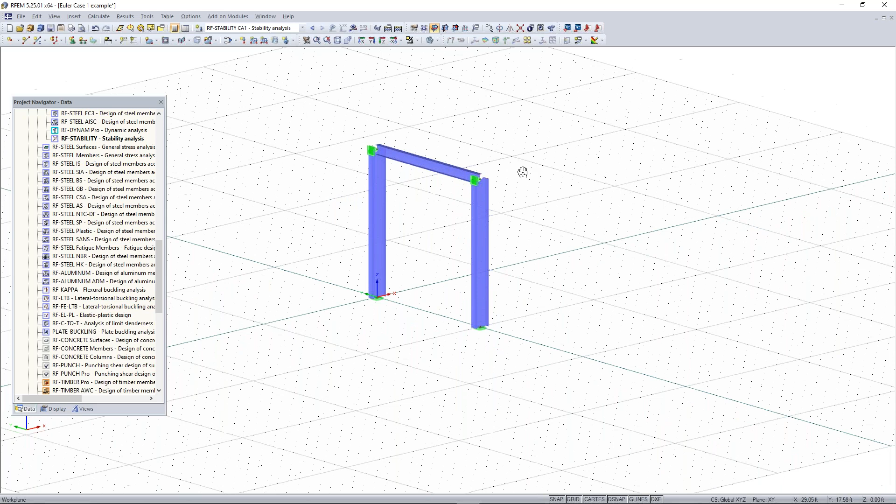The final question is: if we use two members as one metal column, like a built-up column, can we use RF stability the same way? If you have two members modeled separately but forming one continuous column, as will actually be constructed in the field, RF stability will behave the same way. It maybe doesn't necessarily change the mode shape depending on if the member is broken into two separate segments.

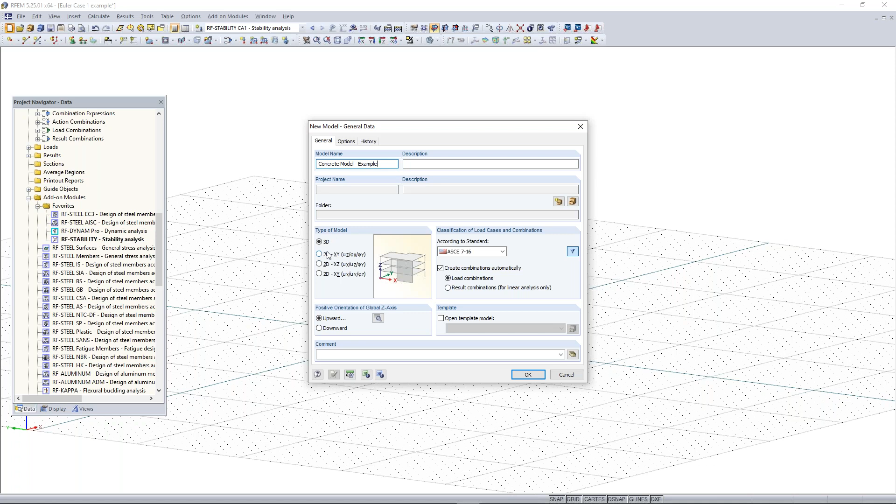Within RFEM, we just need to create a new model. Within the new model general data, we can name this model concrete model, and then we'll just name this example. For this model, we'll keep it as 3D, and we'll create our combinations automatically again. So we can click OK.

Our blank model will pop up here, and we can begin by modeling a concrete surface. So we go up here to new rectangular surface, and for this one we're just going to use the material 4000 psi according to the ACI, and also the thickness of this surface is going to be 8 inches. We'll click OK, and then I can left click on the origin, and then drag out my surface here.

This surface is going to be 46 feet by 40 feet. So we'll go up here and enter 46 by 40. Then we can go up to our toolbar and click on the button called Show Whole Model. We can also choose the reverse Z direction so we can get a top-down view of this.

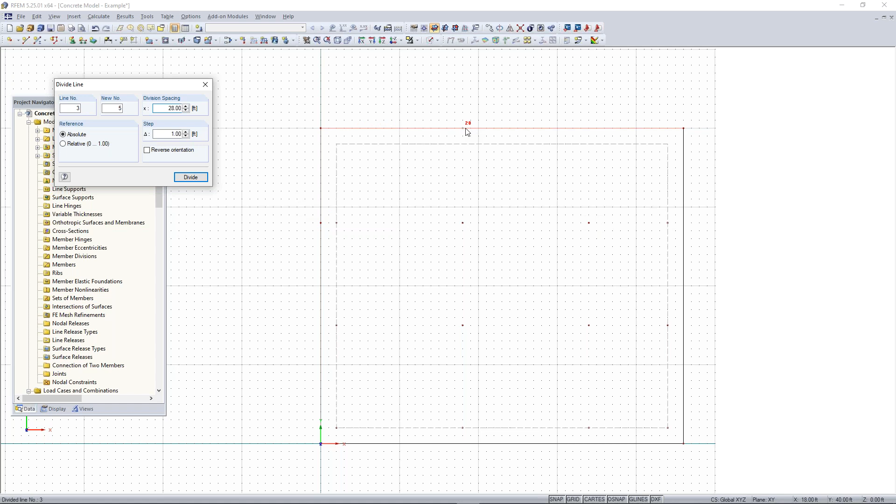Since this is our floor slab, we want to create the outline for the walls on the outside here. Again, we can use our divide line tool and divide this line graphically. The wall on the left hand side is going to be 12 feet, right in line with this column row. The wall on the top is going to be 28 feet, right in line with this column line row. Now we can simply proceed with going over how to model the spiral staircase on the outside.

So I can go up to the semicircle surface here. Our rectangular surface has other options next to it, so if you hit this arrow, we can go to semicircle. What this does is allow you to draw a semicircle surface. If we create this, we just need to give it a thickness and a material, and then we can click OK.

Then I just need to select the center of the semicircle. I'm going to move down 7 feet, which is going to be the radius from the top here. So if I select that, then select my center point and the point on the corner there, now you can see we drew our semicircle.

Once we have that done, we can move on to creating our ceiling slab. We'll take the floor slab, and since it's the exact same geometry as the ceiling slab, it's going to be 11 feet within the distance between the two. So all we need to do is create a copy of our floor slab.

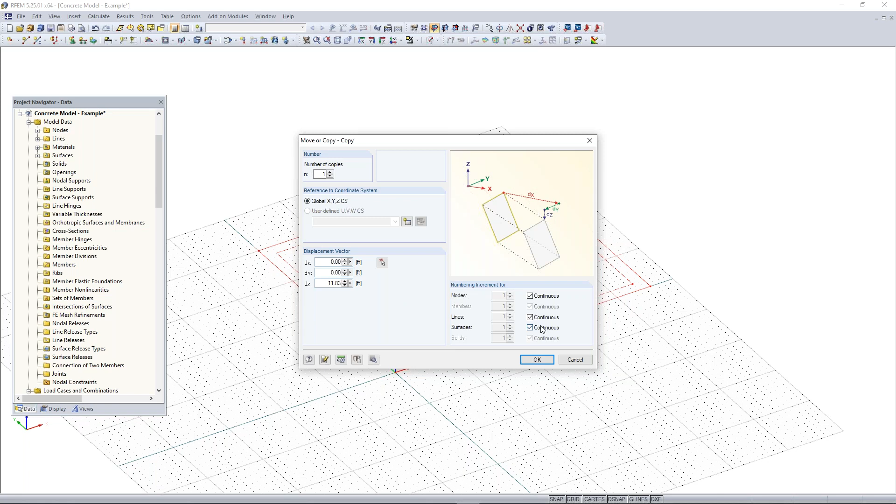We can use the move/copy tool, and simply make 1 copy of this. The distance between the floor slab and the ceiling slab is actually 11 feet. But since the center axes of the surfaces are halfway between the actual thickness of the slabs, we need to take this into account. So we need to take half the thickness of the floor slab and half the thickness of the ceiling slab and add to 11 feet. That's going to come out to about 11.83 feet. So we'll move our floor slab upward 11.83 feet, click OK, and now we have our floor and ceiling slab.

Now that we have both our floor and ceiling slab, we can take a look at it in our isometric view. We can have that view predetermined, and then also get a top-down view. If we look at it from the top down, we can't see both the floor and ceiling slab. So what we can do is turn this into a perspective view. Now we can see both the floor and the ceiling slabs, which will help with getting a better view on how our model is going to look.

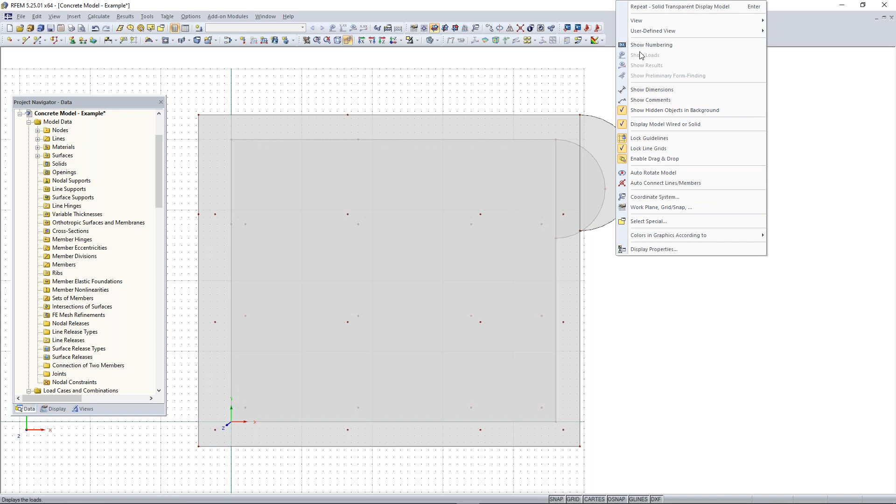So we can now divide our lines here. What we need to do is put a circular opening in our slab at the top. You can see that this line, line number 10, if I right click and show numbering, we can see the numbering of our lines, nodes, and surfaces. Line 10 is 1 long line, so what we want to do is break it up into two different lines at this intersection point at node 40.

To do this, we can use the tool up here, connect members, connect lines or members. I'm going to select that, and then drag over node 40. Now you can see the line was divided between line 10, and now we have line 16. Next we want to divide line 16 by a distance of 7 feet, so I'll right click on line 16, go to divide line, then distance. We want to divide this 50% or 7 feet from the start or from the end, doesn't matter, so we can click OK. Now we have our center point here, and we have line 16, 17, and then again line 10.

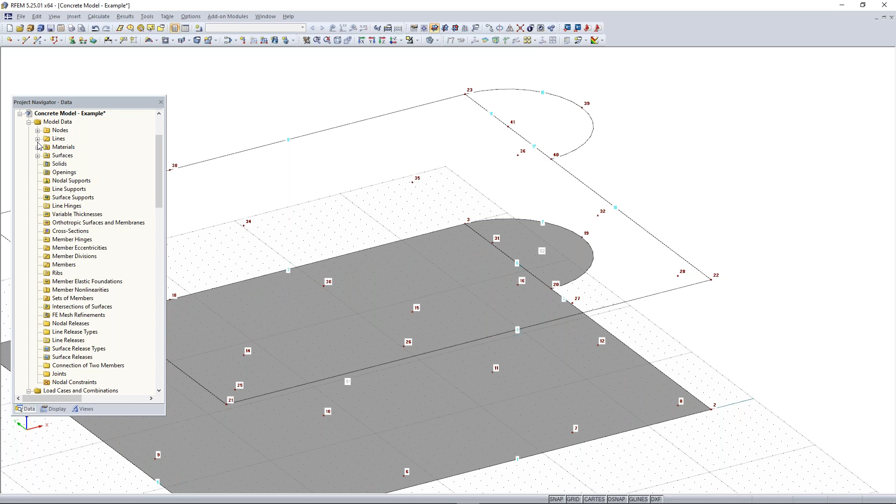Now we can simply delete. We can take this out of perspective view and put it back in isometric, and delete our two different surfaces here, so we delete our surface there and then our surface here. We also want to delete lines 16 and 17. One way to do that is go to the project navigator, under the lines folder, which is another way of deleting or editing lines. I can hold Shift, select both 16 and 17, and hit delete on my keyboard.

Now we want to redefine our surfaces. This is one way, since if you're importing surfaces from AutoCAD you may just get the boundary lines only. So if you need to redefine a surface based on boundary lines, there's a tool next to the surfaces tool. If I hit this dropdown arrow, I can go to select boundary lines, and keep this. I want to change this thickness from 8 inches to 12 inches for our ceiling slab. The material we keep as concrete, and the stiffness as standard. Click OK, and now all we have to do is choose our boundary lines. Now you can see we have one large surface for our ceiling slab.

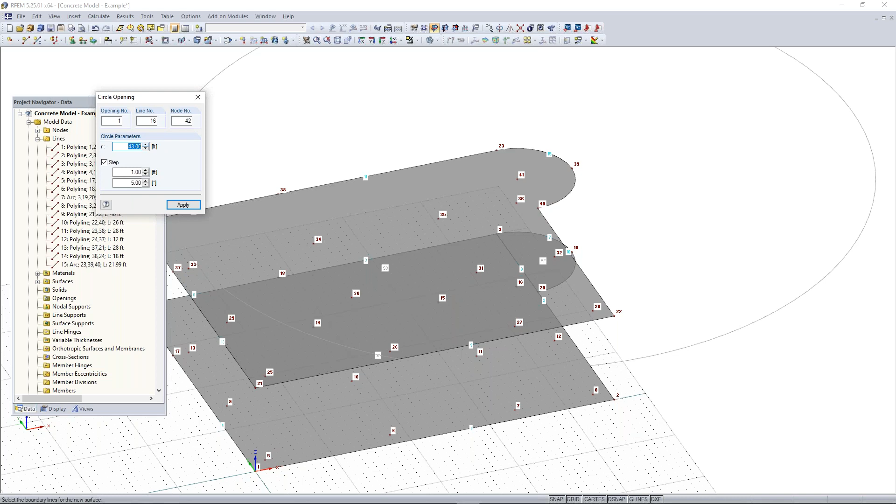Now we want to create an opening in our ceiling slab right here where our staircase will go. Pretty simple - to create openings within a surface in RFEM, there is the opening tool. We go up to openings, and we have rectangular, semicircle, but we want to choose the circular opening. We simply choose node 41 for our center node, and this circle will have a radius of 6 feet. I can choose this graphically - if I define a step and change this to 1 foot, I can easily set the radius to 6 feet, or drag my cursor into this box, highlight the parameters, change this to 6 feet and hit enter. Now if I right click to cancel out of that tool, you can see we have our circular opening here, which will act as the opening for our staircase.

Now the next thing we want to do is define our walls on the perimeter of our model. We can change this into isometric, rotate the model, and take a look at the side where our staircase is. Then the next thing we want to do is create a wall right here.

But first we need to define some lines to act as our boundary lines. We're going to draw a line that's 7 feet from node 20 here, at the coordinates 46, 19, 0. So if we go to 46 and 19, we can select this, and draw our line all the way up to our ceiling. You can see the snap function shows you're drawing perpendicular to the top surface up there. If I left click, now our line has been drawn and it's perpendicular to both our floor and our ceiling slab.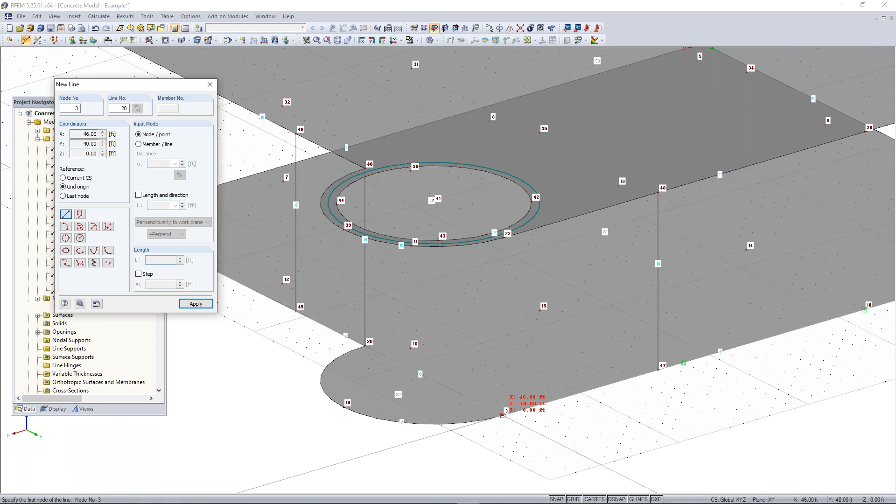Then I can right click, and now all we need to do is connect node 20 here to node 40, then 3 to 23, then 18 to 38, 4 to 24, and then 17 to 37. So now we have all of our boundary lines basically for our walls.

So the last thing to do is make sure that where our vertical lines connect, these lines are all split up throughout our model. We can use the connect lines or members tool to connect those lines and split all of them up. I'm just going to highlight the whole model. Now you can see these lines here are split up and connected.

Now what we can do is create our surfaces. Also, there's an option where if you right click and go to this option here, auto connect line members. I have this turned off, but if you have it turned on, then anytime you connect a line to another line, it will automatically split the line. With it off, you can do this manually using the connect line members tool.

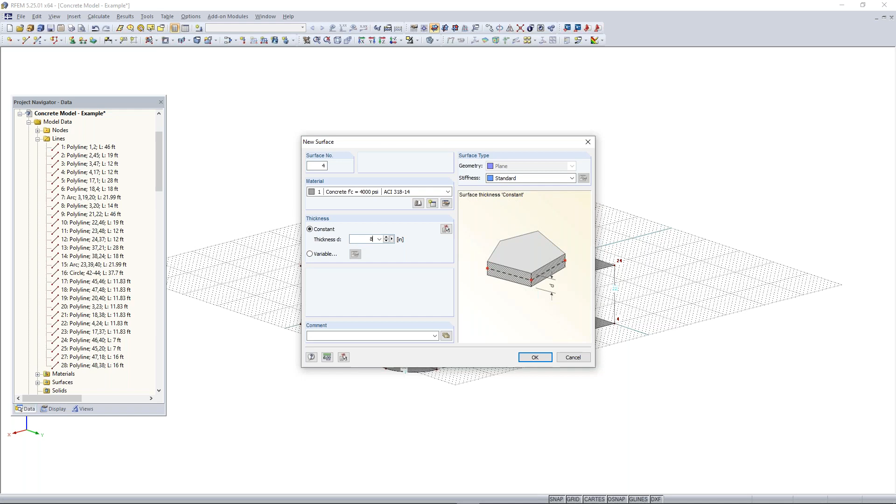Now we want to create our walls here, and again we can use the new surfaces via boundary lines. These walls are going to have a thickness of 8 inches instead of 12, so we'll change that and hit OK. Then I can simply go around and select the boundary lines for our walls. You have to make sure you select these in a chain operation, so if I choose this line, I can't choose this line up here — I have to go around so they're all connected.

Now you can see we have our flat walls there, and now we just need to create our curved wall here. To create curved surfaces that don't lie in a single plane, and if they have 4 boundary lines, you can use the new quadrangle tool. If I go up here to the quadrangle tool, general 4-sided surface, I'll click on that, and then you can see we can choose the thickness and material. I'll click OK, and then simply choose the boundary lines of our surface here. Now you can see we have our quadrangle surface.

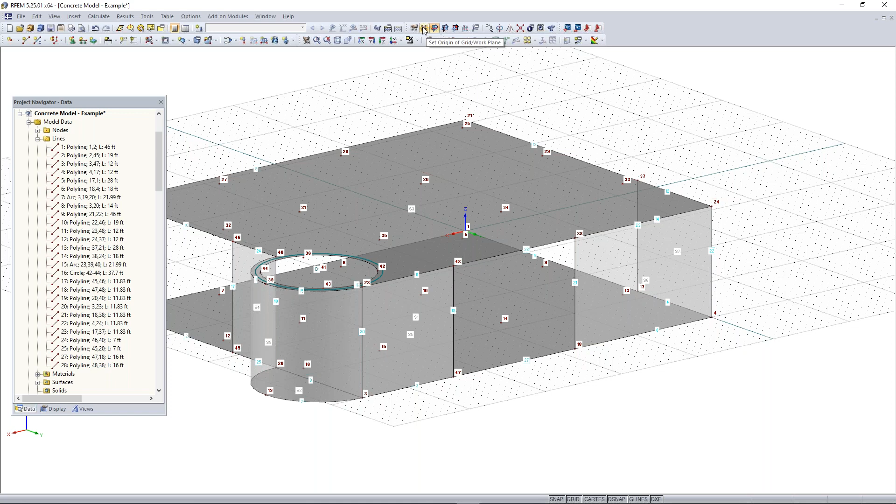So now we have basically all the walls to connect our floor slab and ceiling slab. We're missing one more in the center, which will be our load-bearing wall. So I need to change the origin of our work plane to node 18. To do that, you can go up here to this button called set origin of grid/work plane, and then select node 18. Then I can change my work plane to the XY or YZ plane.

And I can draw a new rectangular surface. I'll click OK, then I just need to select node 18 and node 34. Now we have our new wall there. That'll be our load-bearing wall in the center.

And we can move on with creating our columns now. There are different ways to create these — we could just use the new member tool, or another way would be to just draw the line first. So if I go to create new line, and then connect nodes 5 to 25 here.

I can take this line and double click on it, then go up to one of the tabs here — you can add supports, FE mesh, or add a member to this line. I'll click available, and this will bring up the new member dialog box. From here I can treat this line as a new member and give it a cross section and material. So I'll go to import from cross section library.

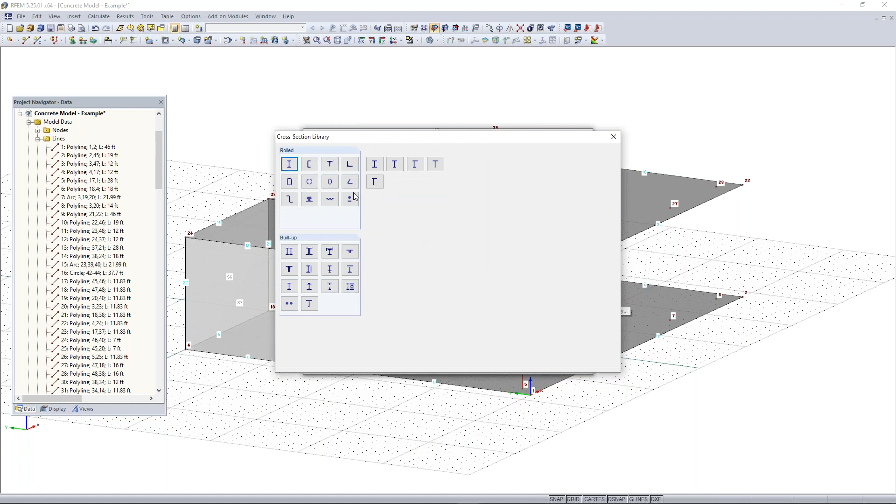Then once that comes up, I'll go to my parametric massive sections and type in the dimensions for the column. These columns are going to be 12 inches by 12 inches, and the material is going to be concrete 4,000 PSI. Now we can hit OK, and you'll see the cross section pop up here. We can hit OK again, and now you'll see that our line has turned into this 12 by 12 concrete cross section.

Now I just need to take this cross section and add it to the rest of these nodes here. I can do this by holding control and dragging this over to create a copy. Let's try that — select this column, and now we have our row of columns here. So now we just need to make a copy of this row of columns. Another way of selecting elements within RFEM is you can go up here to the select special button.

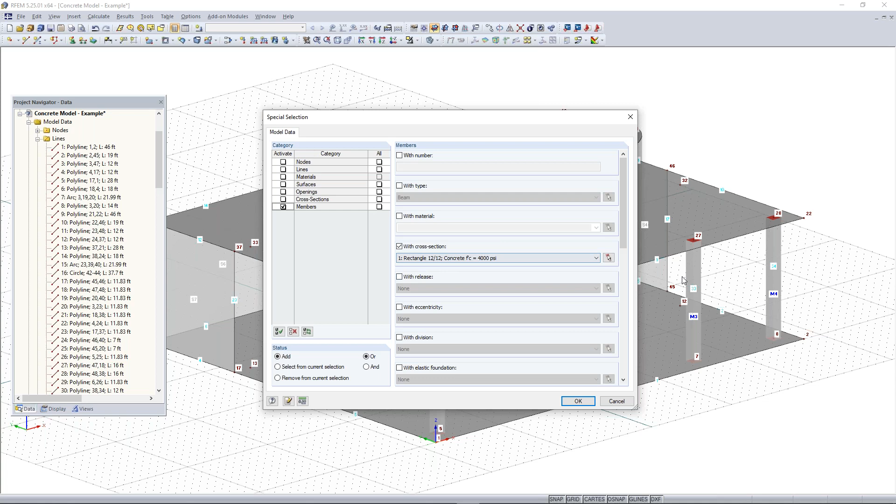We can use this to select different categories. So for these columns, I just wanted to select members, so I'll activate members. Then I can choose on the right-hand side which type of members I want to select—I'll choose the cross-section rectangular 12 by 12, and those are exactly my columns. I'll click OK, and now you can see it selected all of my members with that cross-section.

So what I can do is hold control and then left click and drag, and now you can see that I made a copy of my rows there. That's just an easy way of modeling the same thing. Then I just need to add one more column to connect node 15 and node 35, so I'll make one copy of that. Now we have all of our column members.

So now the last thing we need to do is create our load-bearing beam, or our downstand beam, that's going to connect our outer wall here to our load-bearing wall and to this column right here. I'm just going to delete my node there. To create this beam, we can go up here to new single member, and now I can just create a new member again, so I'll go to import from cross-section library.

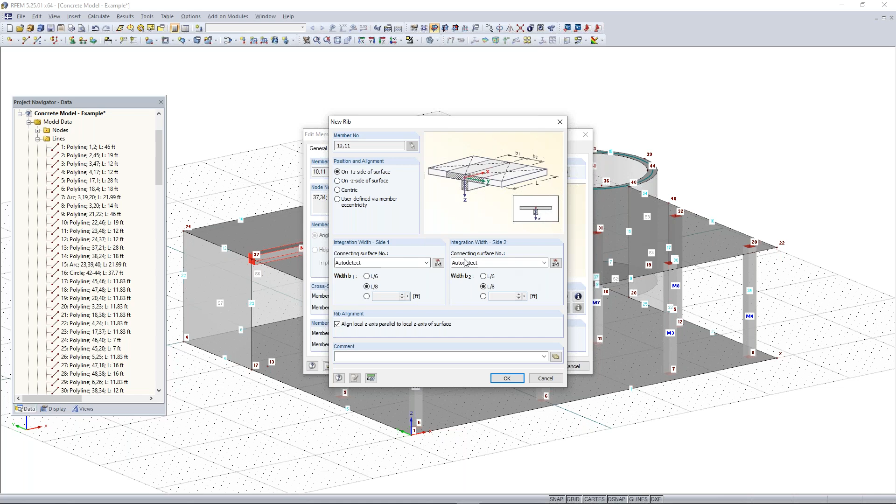So then we can draw our beam here and connect it to our load bearing wall, and then connect and draw it to our column. Then we can hold Control and select both of our members here, and change our member type to rib, and redefine those parameters again—it's going to be on the positive side of the slab for the alignment, and our integration widths for side 1 and 2 will be L/8. We'll click OK, and then you'll see that the program will drop this part down with an eccentricity, and the integration widths are there, but they're just not rendered.

So now we have our downstand beam, and the next thing we can do is add in our last opening to the back of our model here. This will be our opening window into this wall, and it's going to be 9 feet wide and 5 feet high, located 3 feet above the surface axes there. So what we need to do is change the work plane from the XY plane to the XZ plane, and then change our origin to the back corner here.

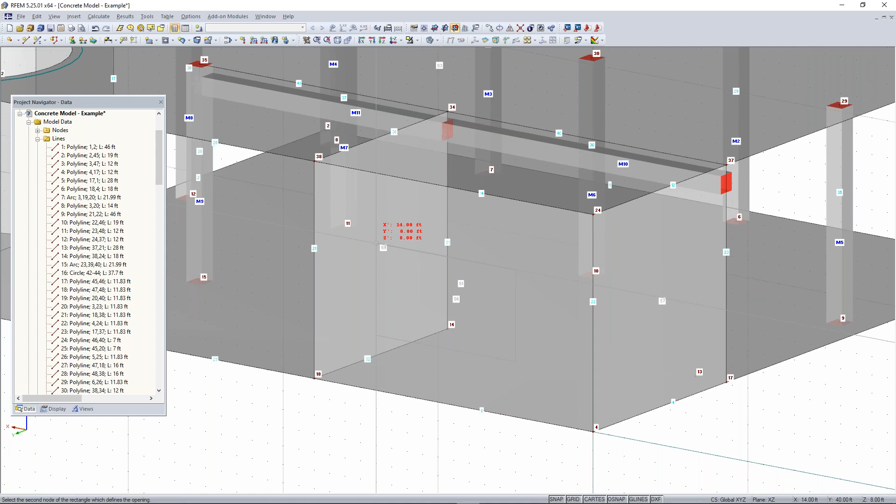Now we can draw our opening, so I'm going to go up here to rectangular opening. Again, this is going to be 9 feet wide and 5 feet high, and we want to start drawing it right here. That'll be the first corner, and then we can put the last corner right here—14 feet, 8 feet above. And now we have our opening.

Now that we have almost our whole model created, we just need to add supports to it. So we can add supports to the left side here. We'll go up to new line support.

We're going to assume that this building's foundation is adjacent to another one, so we want this line support along this whole entire length here. And we also want to make sure that it's defined correctly, so this side's only going to be supported in the vertical direction.

So we want to take away translation. If you check something, that means it's fully fixed. If you uncheck it, that means it's not fixed at all. And if something's partially fixed, you can add spring constants as well.

So for this condition, it's only going to be fixed in the vertical direction. The X and Y directions will be released along with the rotation. We'll click OK, and then click OK again. And now you can see we have our line supports there.

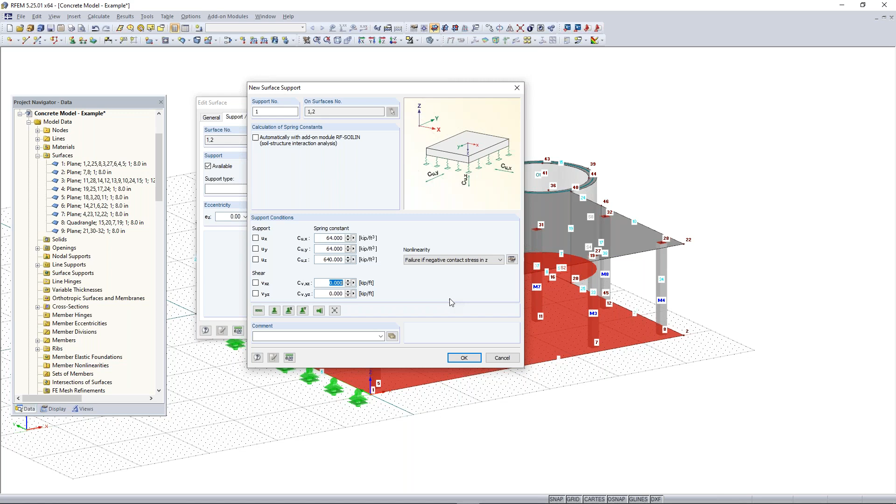But if there's compression, or the surface pushes down on the foundation, there will be support for it. That's what this means for the vertical direction. For shear, we're just going to enter some parameters for the spring constants, since it's not fully fixed in those directions. We'll do the same thing for the shear direction, type in some values for the spring constants, and click OK.

Now you can see our support is defined there under that tab for both our surfaces 1 and 2. We'll click OK, and now you can see on both our surfaces we have our blue supports, and those are our nonlinear supports. If your supports are blue, that means they have some kind of nonlinear definition to them.

If they're green, that means they are linear. These supports, and all supports, are all applied at each FE mesh point as well; it's just graphically shown on the perimeter for rendering reasons. So that's how that's run.

And then we need to add in stiffness modifications. According to the American Concrete Code, ACI 318-19, we need to modify the stiffness of our concrete columns, walls, beams, and flat slabs.

To do this, we can simply rotate our model to an elevation view and select and highlight all of our columns and everything here. Then we can right click on any of these elements and choose to edit our members. We have 9 columns here, so we'll edit them.

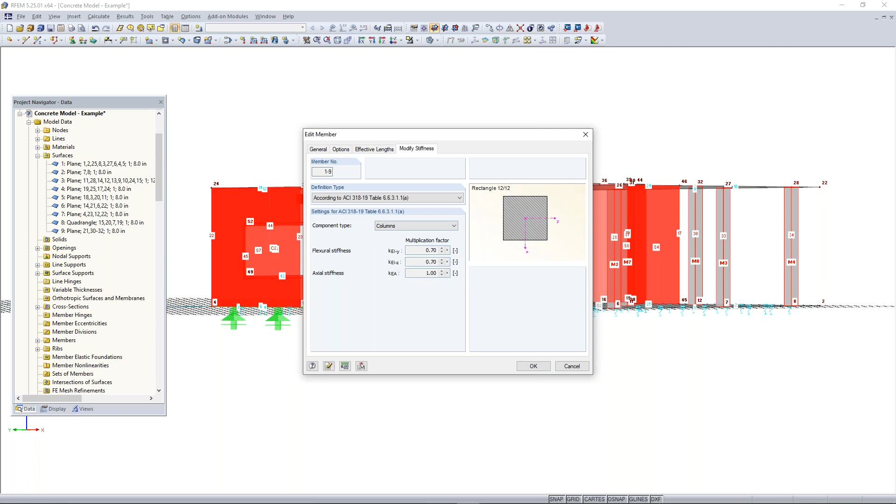So we'll choose the ACI, and make the component type columns, and the multiplication factors here are automatically taken from the standard for columns. We can click OK, and then do the same thing for our walls.

We'll go to surfaces and edit, and then we can change the stiffness by going to the modify stiffness tab, and change this to the ACI and set this to walls uncracked.

And then we can do the same thing for our plates and slabs. So we can select both our bottom plates here and also our ceiling slab, right click on them, edit surface, and then we can change our stiffness here to something like according to the ACI, and we want to set this to flat plates and flat slabs.

And then the last thing we would need to modify is the beam here. So we can hold Control and select both of those, go to edit member, and then we can modify the stiffness of the beam here. It will be according again to the ACI, and this will be for beams.

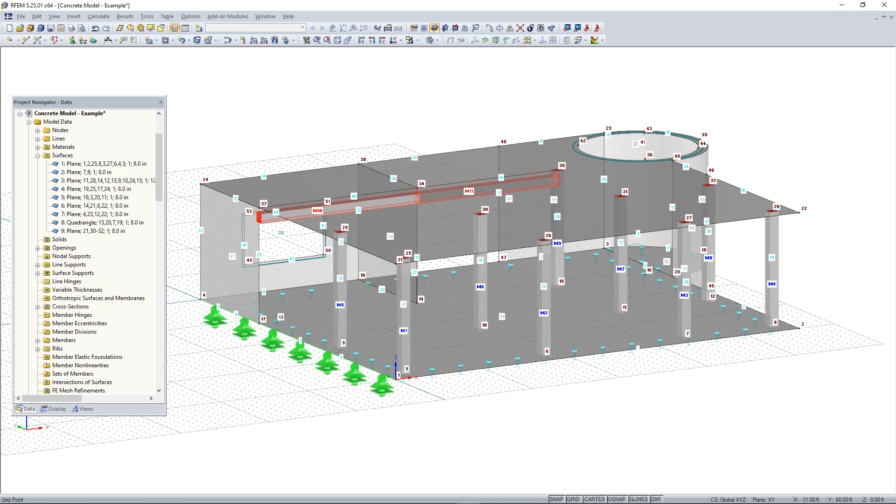So now we have all of our stiffnesses modified, and the next thing we would need to do is run through the loading, but it looks like we're running a little out of time, so we only have a couple minutes left. What I can do real quick is just create a new load case that only involves self-weight instead of adding any loading, and we can just quickly see what the results would look like for this model. So I'll create that real quick, and we'll run the model based off of self-weight.

This will run and shouldn't take too long since we don't have a lot of loading. So this is basically what the results look like. Right now we're just looking at the deformations, and if we turn this into a wireframe view, we can see those better, including the surface deformations. Then we can go through our results for this, and we could design this model — the concrete slabs, columns, and beams — in our concrete add-on modules.

So this is what the results for that would look like. And then we can also see the factors for our deformations. You can see deformations are very low, only at 0.1 inches for maximum deflection. So we can go back to the PowerPoint, and that basically takes us to the end.

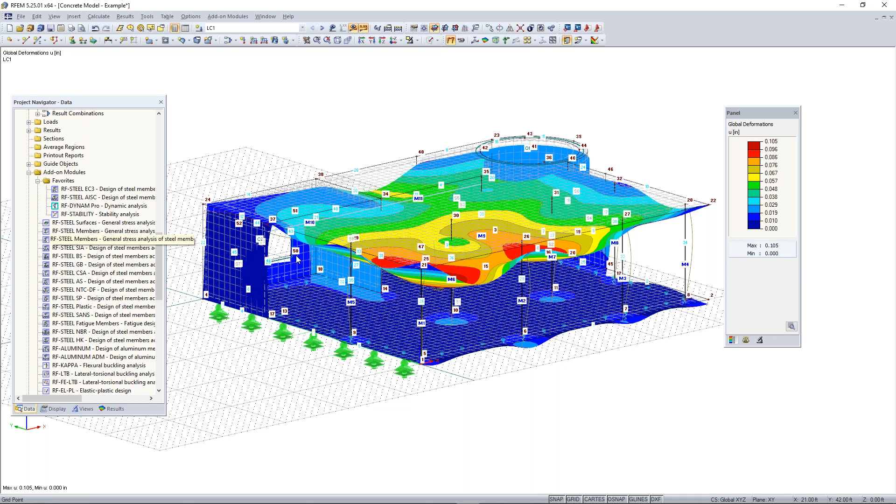The other question is, can we add reinforcement to concrete structures in RFEM? So Alex, you can go ahead and take that one. Yeah, so like I said, for the structure, for example the columns and the beams, we would use the add-on module. I don't have it saved in my favorites, but it would be RF Concrete Members. You could use this add-on module to design the reinforcement, like the longitudinal reinforcement and the shear reinforcement. And then we can also design the reinforcement for the concrete surfaces as well, using the RF Concrete Surfaces add-on module. So I think that should answer your question.